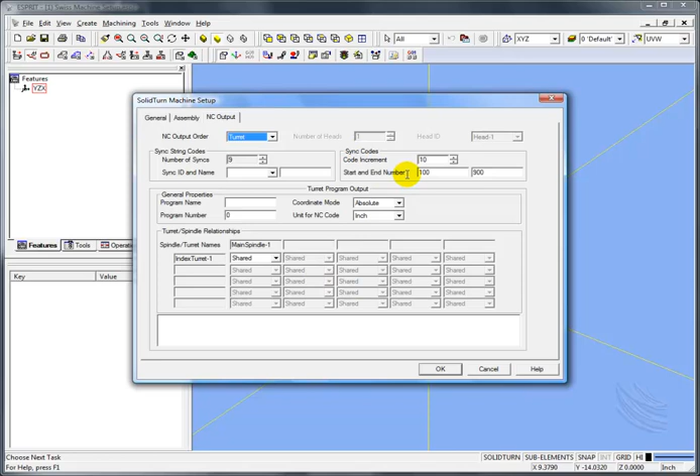So clearly we don't have enough information here. And if I go to the NC output page, this is set up to post by turret. There's no information about heads or anything of that nature or synchronization that's listed. Those are things that we're going to add ourselves.

Now this file is not completely blank. There are other components in this file. They just happen to be on some other layers. So I'm going to open up my layers list, and we have a number of layers predefined on this particular file.

If we start with the main gang, I'm going to open that up. You'll see that I've already constructed a solid model of this main gang. And in fact, we also have some views here. If I go into a work plane or view plane for the main, looking into the part this way, you'll see that we have some dimensions thrown up here so we understand how the tools are to be laid out on the part.

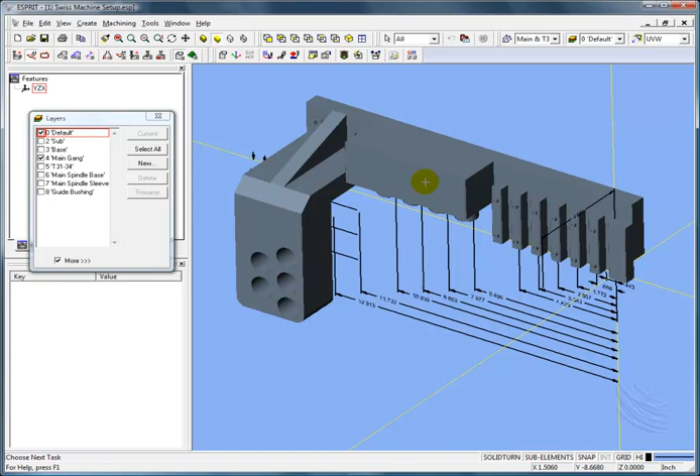Now, if we take a look, this solid model is something I have modified a bit. I'll admit I borrowed this from another machine setup and just modified it to suit my needs. But it is a solid model, not an STL file. It is a solid, because one of the things we're going to do is make it suitable for making a solid out of this. So this is designed to match this picture here for the main turret, the main gang. So it's on this main gang layer.

The next component we'll mention is the sub. I have a sub listed here. If I roll this thing around so we can take a look at the other side, you'll see it has the sub, and the 3 stations attached to it. Again, 2 of those stations are live, and the 3rd station is a fixed station.

The next component to look up is one called T31 through 34. That's this end working station. I'll roll it around this way. That's the end working station that matches up here with these tools laid out like this. So the first station you see listed there is a fixed station, and the other stations are rotating stations.

Now you'll notice that on each of these, if I change this so I can see it, on each of these solids I have laid out some dimensions so that we know these dimensions. This is important because we need to know the distance between these stations - it's not enough to just have the solid model there, we must also tell the machine setup how far apart the tools are going to be located at each station.

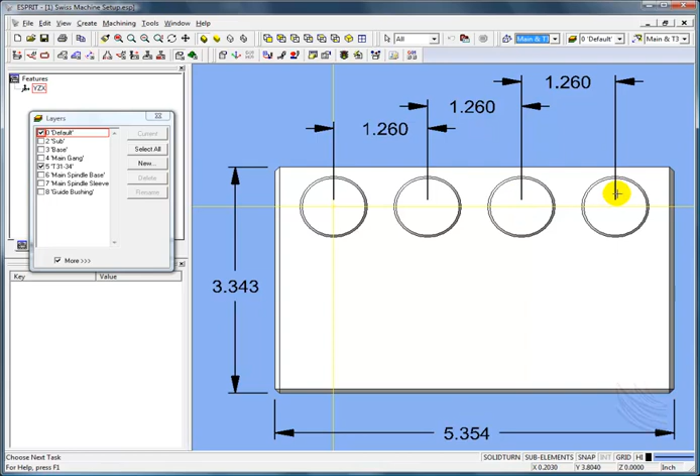So it's important you also notice the positioning of these solids. For example, this solid is setting so that X0, Y0, the origin - we'll talk about the axes in a moment - but the origin is in the middle of this first station. And if I look at the sub spindle, you'll see that the origin is sitting right in the middle of that station, of the sub spindle.

And if I turn on the main gang, you'll see that the origin is sitting at the locating area, this locating face, of station number 1, the very first station that goes in, the first tool that will go in. That's where it's located, and that's where the X0, Y0 would be located.

So if I turn all of these on, it's going to look a little cluttered because they're all going to be kind of sitting on top of each other. But this is important - it's set this way for a reason, and that reason is that when we actually define these as axes, as machine setups with axes, when we use these components in the machine setup, it will have a point of reference to move from.

And so it will know that when it goes to X0, Z0, it knows that the main spindle is going to be on center line. So it's important to have that point of reference. So you don't just simply put an STL file or a model up there and haphazardly place it on the screen. It's important that you locate it such that the machine setup will understand and use it properly.

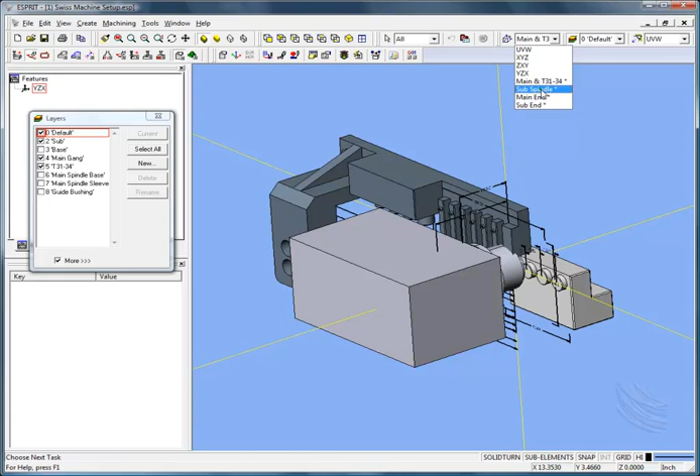Now the next thing to take into consideration is the axes themselves. If I change back to my work plane of XYZ, and you see I created some other work planes, and they're really more for convenience than anything. If I go to the sub spindle, I'm looking into the sub spindle. If I go to sub spindle end, sub end, I'm looking in the end of the sub spindle. Or if I go to the main end, I'm looking at the end of the main gang.

But if I go to XYZ, and I'll roll this to kind of an isometric view here, like so. If I now turn on my axes indicators, if I do a right-click, view, get out here on the screen a little easier so you can see, right-click, view, and UVW axis, you'll see how the axes are laid out. They're really not laid out the way you might think they should be.

For example, if I'm normal turning, pretty much everything is set in this orientation in the XYZ work plane. If I can get a top view, it's this view right here. But you see how these solids are not laid out in this orientation, nor are they laid out in an orientation that really makes a lot of sense other than to the axes of the machine. And you see how the Z is pointing in this direction, the X is pointing in this direction.

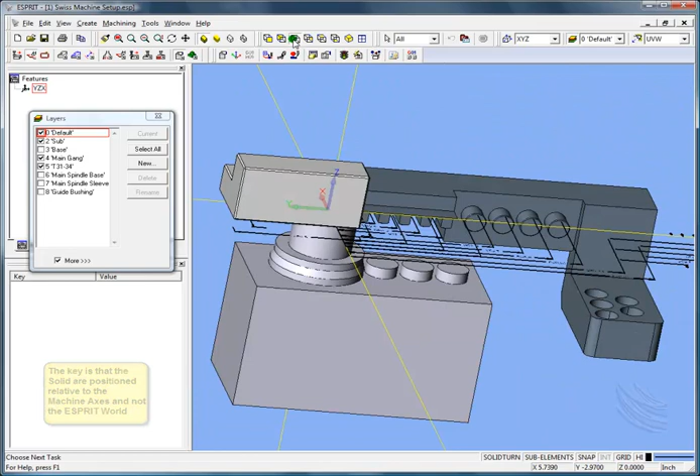Now if we look at that from, let's say, the end of the part, let's see what we get here from a view that we might want. This main end view here. This is really the view if I'm sitting as an operator looking in the door at this machine. Now the only thing that's a little different about this is if we look at the axes, we see that this is a Z, and this Z is actually going positive in this direction, and this Z is going negative in this direction.

Well, what we'll do is we'll actually tell that information in the machine setup when we tell it the direction of Z there. But we're going to leave it in this orientation because we want the X and the Y values to be correct relative to the normal orientation of the machine. So as it sits on the machine right now, this axis here is going to be Z. Here's my X going up and down this way. And then, of course, my Y-axis will be going across this way.

Now, once I have these components created, and again, I'm not going to go through the process of drawing all these things from scratch. We cover the way to use the solid modeler, which is found over here under Create Solid Modeler, in other tutorials. We cover that in the beginning tutorial. We also do a little bit of that in the advanced milling and the advanced mill-turn tutorial as well. So these are already predefined and created as solids.

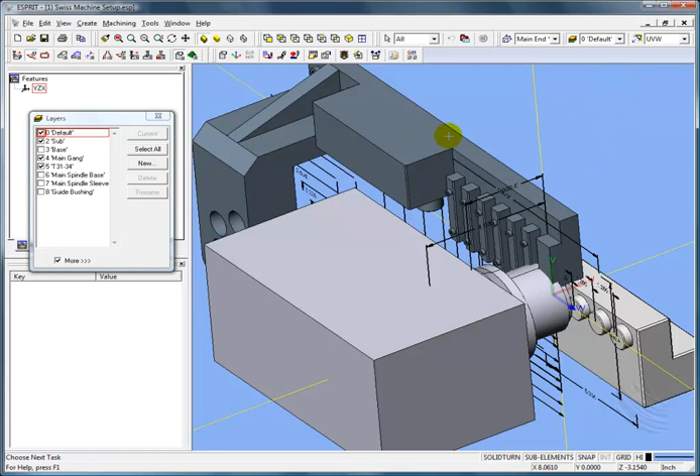Now, one of the things I need, if I'm going to use these in my machine setup, is to actually create what we call STL files. That's what we actually use in machine setup. So what I'm going to do is actually group one of the solids. Now, if you have multiple solids on the screen, that's fine. Just whichever one you group is the one that you'll be able to create an STL file for. And while I have this grouped, I'm going to go in and save this off as an STL.

Now, the process I'm using right now requires you to have the STL Data Translator. As I mentioned before, it's not necessary to have these solid models. However, there is a keen advantage, and you'll see as we use this machine, in having these. Now, if you do not have the STL Translator in your Esprit license, then certainly you could use any other CAD product to create these STL files.

Only thing I caution you about is I would first bring those solid models into Esprit and position them in the right location with regards to the axes and the origin, and then maybe pass this file back to your CAD software as a Parasolid or ACIS file. And then in your CAD software, you could then construct the STL files. But you don't want to just throw STL files out in space somewhere. The machine setup really is not configured to try to find those locations. It's best to prepare these up front like I've done here.

So I've grouped my main gang, and I'm now going to go up to File and Save As. Now again, keep in mind that I'm doing that because I have the STL Data Translator on my Esprit license. And what I'm going to do is I'm going to drop down to Save As Type, and I'm going to tell it I want to create an STL.

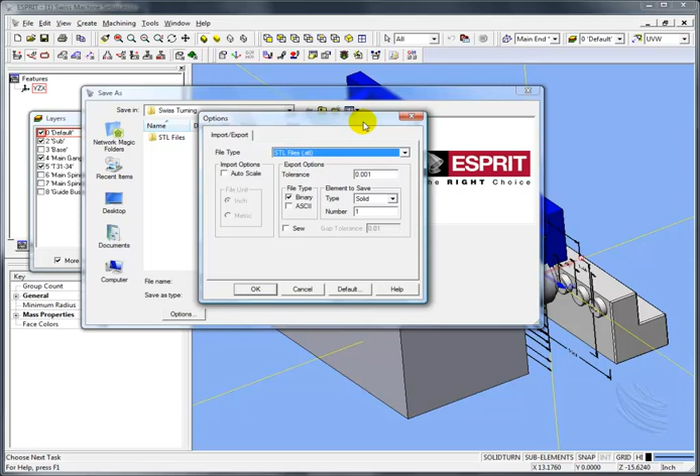Now, one other consideration to look at is under Options. I'm also going to look under STL, and if I want to, I can adjust the tolerance. This is one thing that gets a lot of people in trouble: if they go to the trouble of building a really complex solid model of a component for their machine, say they add a bunch of screws or some text, some engraving, coolant nozzles, whatever fancy things you want, you can clearly model those things on here.

But it can kind of bite you a little bit if you make some really fancy solid, and then when you start running Esprit with that solid, you start finding some performance issues. So one way to help reduce some of those performance issues is that you can go into the Options page and change this tolerance. Let's say I change this tolerance to 50 thousandths. That will create my STL file with a higher tolerance and make the file much smaller, and that will help improve your performance.

And of course, if you're doing this in some other CAD system, you'll have to use their technique to change the tolerance. Esprit, when it uses these STL files in the simulation, in the machine setup, does not have any way of filtering or making this file smaller. It's going to use the file as it was constructed. So any decisions about increasing tolerance for performance need to be made at the time of creating the STL file. So I've set my tolerance.

I've hit OK, and now I'll give it a name. I'll call this my main gang turret, and I'll hit save. When I do, it creates an STL file. Now I'm going to save this next one. By the way, if you don't group anything and you go up to File, Save As, in Esprit at least, and I say STL file and give this a name, I'll call this my Sub Spindle.

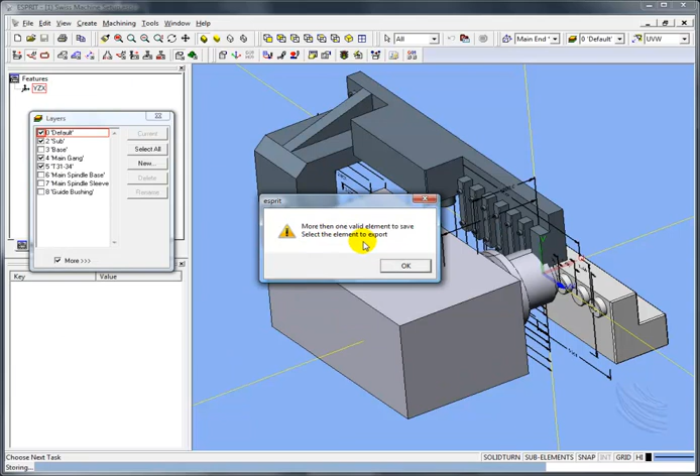If I hit save, it's going to give me a warning. It says more than one valid element to save. Please select the element to export. So I did not identify which solid to do this with. So you have to make sure you pick a solid first. Then you can go in and Save As and use your STL. So under STL, the option should still be set to 50 thousandths, and it is.

So I'm now going to give this a name. I'll call this my Sub Spindle Turret. That's what I'll call it. And I'll go save. Now I'm going to go ahead and pick the next solid here, and I'm going to go in and save it. File, Save As, STL, and we'll give this a name.

This will be the end working turret. Oops, my fault. Let me change that back to STL, and let me pick the right field first. Kind of silly me. End working turret. There we go. So save that one. Now I do have some other components here, and I'll just turn these off.

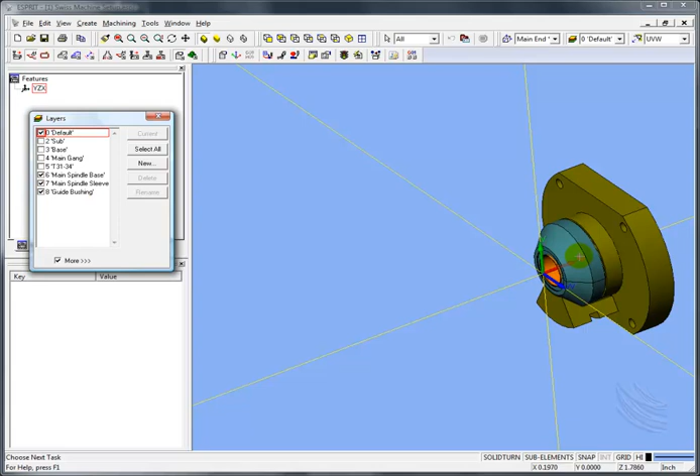And I'm going to now turn on a main spindle base, a spindle sleeve, and then our guide bushing. We'll talk more about the guide bushing a little later, but it's an important reference for you. Of course, any of the Swiss machines have a guide bushing. The point is it's best to have something graphic to illustrate that guide bushing, and I do that in this case. So we have three other solids we're going to add.

So first I'll grab this one, and you see again where it's positioned. This is positioned at 0, 0. Let me get a top view actually is what I want. There we go. This would be Z0, if you will, on the machine. This distance back from here to here is how far it is from Z0 to this spindle face.

Different machines, different values. The point is these solids are set up correctly with regards to that distance from Z0 to this locating face of the main spindle. So I'll select this solid. I'll do a File, Save As.

We'll tell it it's now going to be an STL file. And we'll call this the main spindle base. We'll give it that name. Call it a base. I'll pick the next solid here. I'll do a file, save as, and STL.

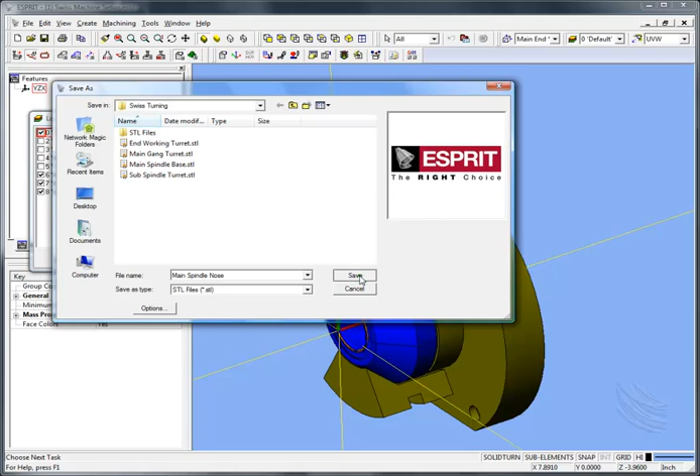Click on the name field. This will be the main spindle nose is what I'll call that. Let's fix that name. There we go. Spindle nose. Save that. And let's get this guy here, this solid inside. I'm using this as a bushing. We'll talk about the size of that bushing and how I've designed it that way.

File, save as, and STL, and we'll call this the guide bushing, and save. Now you will notice as I save this that there was an existing STL folder there. That STL folder has really the same exact files that I saved previously that I'm using in the files that are the completed portions of this. So even though we're going through this from scratch, these STL files have been saved in another place, and they're on your system as you install the Esprit files.

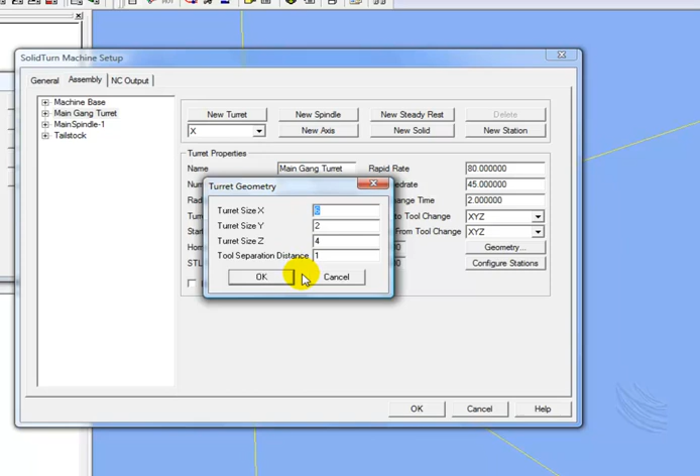Now the problem with that is, of course, what you'll end up with is just a single block, and that single block is really not going to help us much with this shape that we're going to be working with. I mean, we could define this main turret as one of these blocks. We could even attach this as part of that block as well, but we really wouldn't be able to put this on that same block because this type of gang turret is really only going to be good for maybe these first 10 stations. We'd have to create a separate one here, and I really don't want to do that because this block is actually attached to this, so they float together.

So really we want this all to be one unit, which is what we've done in the solid model we have. So in this particular case, since we have a solid model, the choice of gang is really not appropriate. So I'm going to change this gang now to what's called a custom. Of course I wouldn't use magazine either because that is for a tool changer. I'm going to use a custom. Now when I hit custom, you'll see how the geometry and configure stations disappears. That's because it's now going to use all the information that we plug into the machine setup to customize this particular turret, including the graphics of that turret.

Home position, we'll talk about that in a minute. Ensure tool number matches station number. I'm going to do that. That way when I define a tool in a station, I make sure the tool number matches. That's a real handy tool in this case. I really like to use that on anything unless it's a magazine. A magazine is the only place where I won't do that.

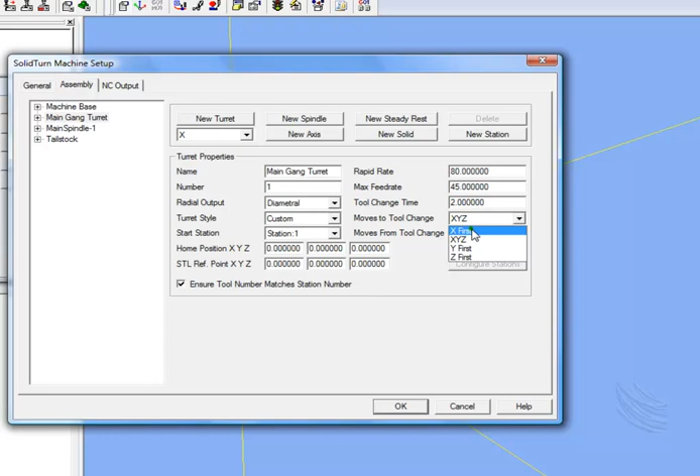Any of the other adjustments, I might make a move to tool change. I might adjust that to move X first, so it moves up in X. Right? The rest I'll leave alone. So now once I have done that, I can now move over and open up the main gang, and we can then talk about axes and tool stations. Axes I'll come back to in a minute. I'm going to start by going ahead and defining the tool stations that I want to define.

Now, I'll close this axes for a moment. Currently there are 6 stations in this turret. And again, that's the default with the normal turret. But really what we're going to be using in this particular main gang is 15. We have 15 stations here. So I'm going to go in and add those stations. I'm going to go up and basically say new station and continue adding new stations until I get all the way to 15.

Now, identifying those stations is only part of the battle. It's only a little piece of what we need to give information-wise. All that does is tell us that there are 15 stations. It has nothing to do with where those 15 stations are located. That I have to identify by going in and adjusting that inside of each station in these settings.

Now the first thing I do need to deal with is when I click on a station, you see how this angle changes? That's because these first 6 stations were defined as an index turret. I really don't want that. So one way to deal with that is to go back to axes. I said we were going to skip axes, but we're going to come back to it for right now. We're going to hit this index and delete it. So now there is no index axis. So when I go to station 1, you won't see anything here because there's nothing to index. So that's all going to remain dimmed.

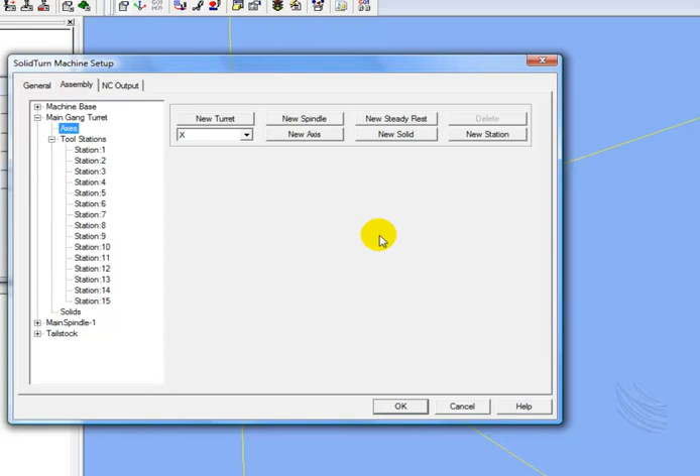Now, the order that you identify axes, when you define an axis with a turret or a spindle, it's important that the order becomes what we would call a hierarchy. By that I mean the order you identify the axes is the order of importance of the axes. So I'm going to identify first my Y-axis, because clearly for any tool to work, Y has to move to position that particular station relative to the part.

So I'm going to simply grab Y and hit new axis. Now, for a label, I could leave the label Y, but really it would make more sense to label it like the axes show. I'm going to use Y1 and X1 for my label. So I'm going to call this Y1. I have the information here as far as the axis vector: it's going to move along Y. That's what the 1 means here.

And then we have a minimum and maximum position. I'm going to tell it that it can move minus an inch and it can move plus, let's say, 20 inches. If you know the exact value, plug that in. Now, does that necessarily mean that's going to be a hard stop in the machine? No. However, you can add logic to your post processor that can look at this number, and if you exceed these values, you can have it flag you in your code if you wish. It's not a bad idea to go ahead and plug in the appropriate values here.

Now, I'm going to plug in the next axis, which will show up underneath Y1, meaning it will be the second most important axis on this turret. That'll be the X-axis. And I'll say new axis. There's my X. This is going to be X1. It is linear, and you see the 1 is in the X vector, which means it's going to move along X. Let's say the minimum position is minus a quarter of an inch, and the maximum position is 12 inches. So I'm identifying the axes of motion.

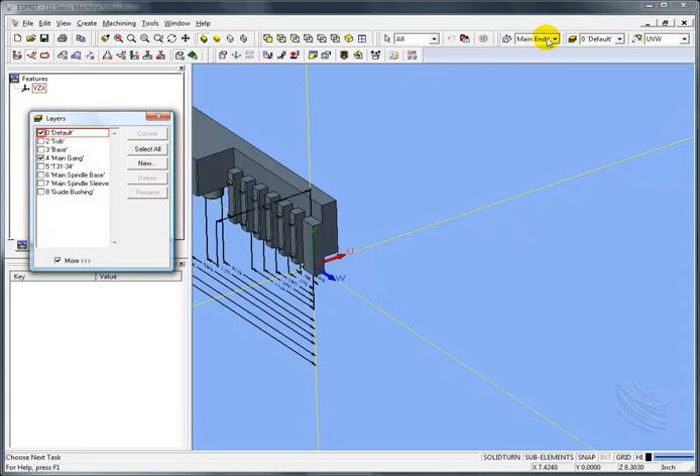So I'm going to identify some of that information from our graphics file. I'm going to minimize this because there's no dimensions here, of course. I'll move this out of the way a little bit. Actually, let's hit OK real quick, go back into our layers and turn on our main gang. I'll get a view, look in top, and zoom in closer. When we open up machine setup, we should be able to see some of these dimensions, and we'll work our way back and forth from there.

Now, one thing I will point out is it may be necessary to actually shift some of these dimensions both in X and in Y. Clearly, I'm going to be shifting some of these dimensions along this axis, which is the X-axis in this plane, but in the machine we're looking at that as being Y. That's my Y-axis. So we have that information to be plugged in from the Y. But we may also find some stations that need to be offset off-center. So we've got it in position. We zoom in a little tighter, and let's now open back up our machine setup.

I'll move it out of the way a little bit so we can see both. Alright, so now we go to assembly, we go to the main gang, we go to our stations, and we click on station number 1, which will be this station right here.

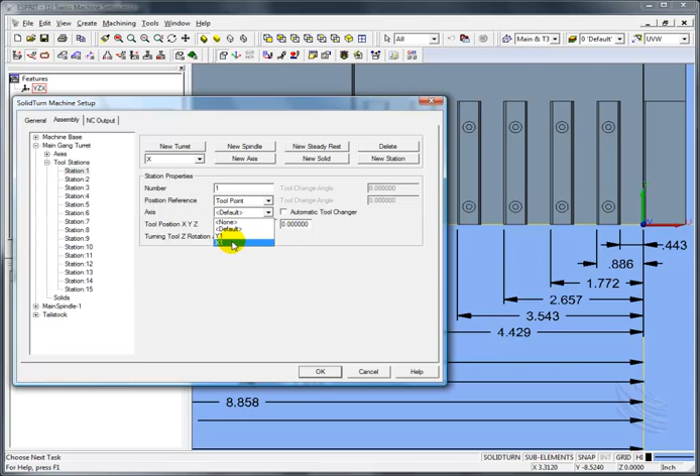Now, under axes, you'll see I have those axes. I could identify a tool to move with an axis, but that's really not what we want to do. Really what happens is this entire gang turret moves with every tool. So leaving this on default simply means it will move with the default axes of this gang turret. If I change this to something else, I'm telling it that this station can move independent of this main gang, which it doesn't.

Now, if we look at the values here, I'm going to start with 0 here, and I'll say 0, 0, 0, which means I'm telling it that the location of this tool is going to be located right here at 0, 0, 0 for station 1.

Now for station 2, and by the way, you wonder where that 7 inches comes from. You'll find that all 6 of these stations will have 7 inches on them. When I go to 7, I won't, and that's just because they were part of the original index turret. So those numbers were in there from that index turret.

I'm simply editing those. So we're going to make sure that each of these stations is set to tool point, default, and we're going to plug in the appropriate location. So station 2, tool point, axis is default. Change this to 0, and now my Y will be minus 886 thousandths. So minus 0.886. Okay, now from here I go on to station 3.

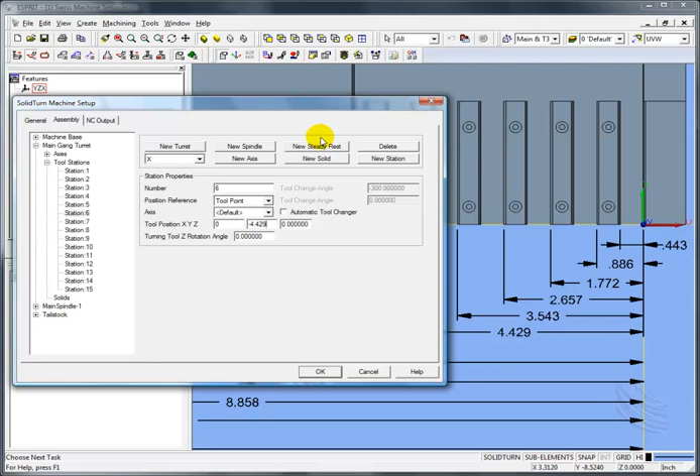Change that to 0. Change this back to tool point. And now change this number to minus 4.429. And that gets all of those. Drag it out of the way, that's all of the turning stations.

Now I'm ready to move on to the next stations, and to do that I'll hit OK so I can move the screen. Okay, and I'm now going to drag this down, and now I'm ready to look at these next 4 stations here, which is stations 7, 8, 9, and 10. These are the live tooling stations.

Now one dimension I see that's missing, so let's take a quick look, is you see how that station is actually off-center from 0. And so I'm going to need to know what that off-center is. And if I look, wireframe, there's no geometry here. So I'm going to go in and kind of construct some geometry.

I don't want to get geometry for the whole file. I don't know that that's really all that necessary, although it won't hurt. Let's take the whole solid. I'll do a right-click, copy. And under transformation type, I will say I'll do a smash. And I'll change it to a wireframe, and I'll set the tolerance to about 1,000th, and I'll hit OK.

And that's going to get wireframe geometry now. Now I can go in and change my filter to geometry. I can pick one of these diameters here. And what I'm looking for is the center point. I'm looking for the center point of Z. And I see the center point of Z is minus 433, minus 0.433. So knowing that, that's how far off center the center of that station is going to be.

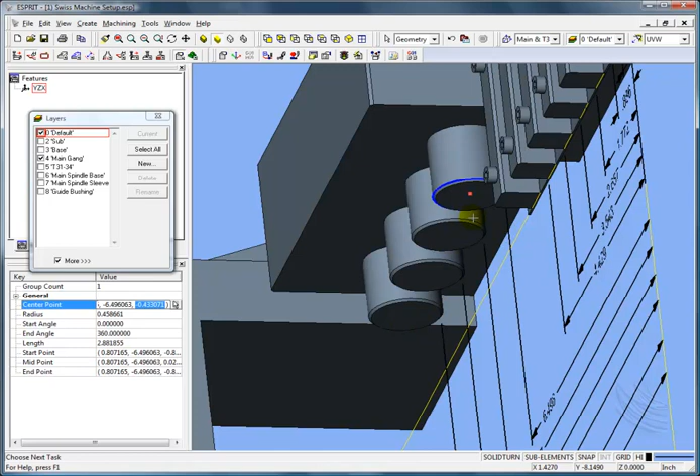So for station 7, instead of using the tool point, I'm going to have it use the holder base. That way the length of the tool will be reflected from a fixed location. If you look at the turning stations, you can slide those up and down to be really anywhere, and that's why I use tool point there. But here, the tools are fixed - they're loaded in and only go in one location. They can be different lengths sticking out, but we define that when we define the tool. So holder base is really a better choice for these live tooling stations.

Now for tool position, we're going to plug in 6.496, so it'll be minus 6.496. Then we're going to make the shift in Z - that's the offset in Z. And the direction I'll shift this in Z is minus 0.433. See how that works?

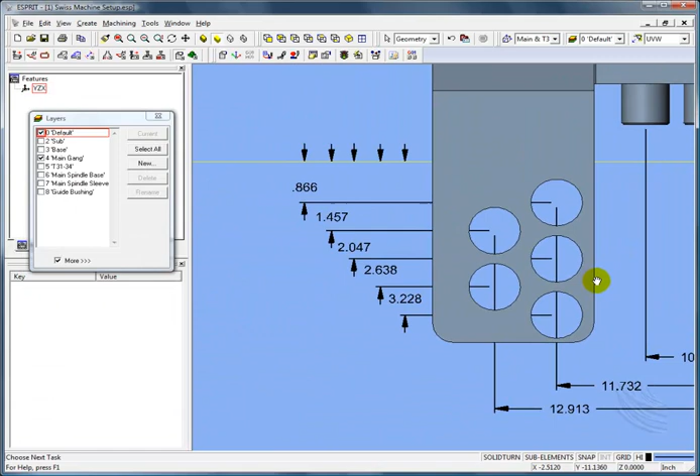Now I'm ready to look at these next stations. These next stations are basically holes in this block, and we have the locations in Y, the Y minus locations. But there's also another dimension here. Let me get the main end view - you see this dimension here, 4.638. That's the dimension from 0 back to the back end or locating end of this face. So I'll define the tools relative to that.

Now, probably I should have thought this through a little better - I might have rather done this from the middle of this base. Why not do that? Because that way we can define the tool from the middle going in either direction. So let's determine what that's going to be.

I'll do that by going in and creating another quick dimension. I'm in this work plane, so I'll go up to dimensioning, and dimension from 0 to the middle of this connection line, placing the dimension across there. You'll see that it says 3.697 - let me move that dimension a little bit. There you go, 3.697 is what that is. So I know that dimension. What I'm doing right now is writing that down - 3.697, because I have a short memory.

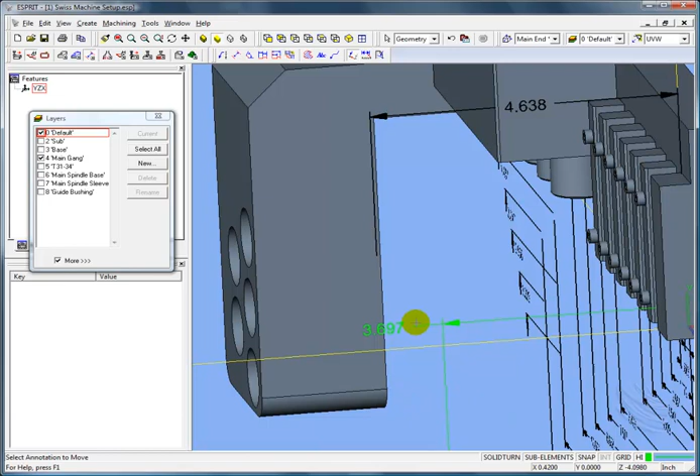So that's the distance we'll shift off center in Z for those tools. Now, next thing we're going to do is get to a straight-on view here and zoom in so I can see those stations, and we'll open up our machine setup again.

Keep in mind that what we're defining now are these stations 11 through 15. So we'll go into main gang turret, tool stations, starting with station number 11. 10 we did, and we're going to do 11. We'll also use the holder base again, and we'll turn automatic tool changer off. We'll change this to the first line, which is 11 point minus

I've modeled this thing actually a little differently. I looked at the picture, but I've modeled it with 3 stations on this side, 2 on this side. Since I have the solid model created, we're going to use this method. I just now noticed that.

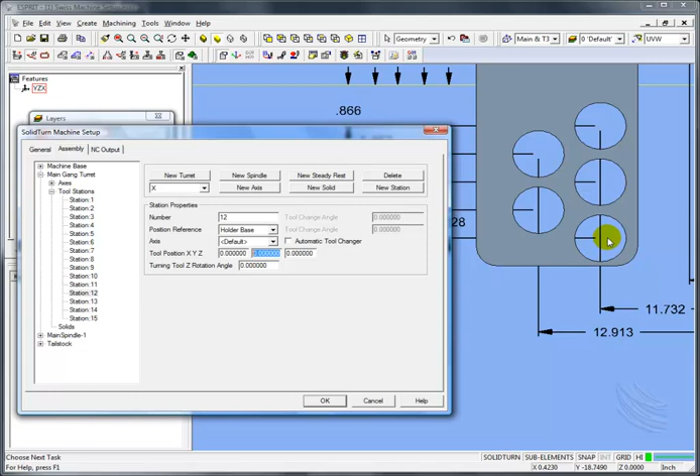11.732. Now the Z will be minus 3.697. Okay, see how that works? All right, now let's go to station 12. No automatic tool changer, so I'm making this one 11, 12, and 13, and then 14 and 15. So 12 is right here.

All right, one other thing, let's go back to 11. There's also a dimension down in X. That's this dimension in this direction. You can see that dimension here is 866. So station 11 needs to be minus 0.866. Now we go to station 12.

The automatic tool changer is off. That's going to be the next dimension down in X, which is minus 1.457. And the Y will be this dimension here, the minus 11.732. It's this station right here that we're doing. Actually, my X is wrong, isn't it? It should be this 2.047.

Minus 2.047, get it right here. So minus 2.047 gets us to this line, which takes us to this station. That's the station we're doing right now. So there's my dimension in Y, there's my dimension in X. And of course, my Z will be the same number, minus 3.697. Now I'm ready to move on to station 13.

Station 13, I've got a little bit off the screen here, but that's okay. Station 13 now is setting here. So the X is going to be minus 3.228. Y, okay, the Y dimension is going to be this same dimension, the minus 11.732. And the Z will be that minus 3.697 dimension.

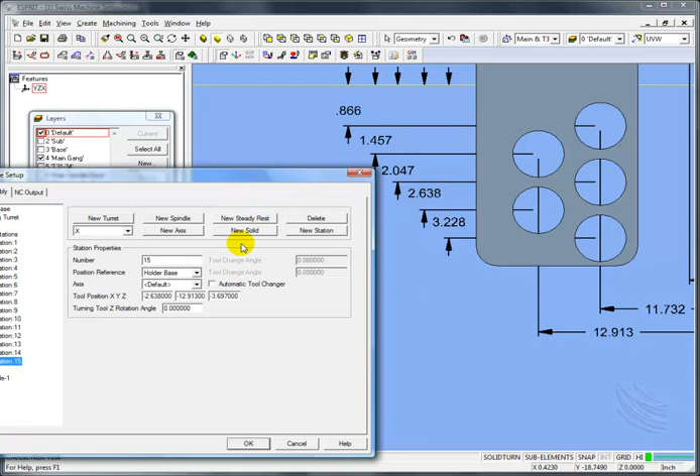So it's important, especially on a Swiss machine, that any tool mounted in the station is used properly. Okay, so it's display. We want it to be displayed, so we want to make certain that this automatic tool changer switch is off. That's very important. Okay, so now we're done with the main gang turret. We're ready now to move on to the next component.

Well, now that we've added the stations and axes, there's one more component we need to add to the main gang turret, and that's going to be the solid model itself. So we select on solids, and we're going to define a new solid, and I'll give it a name. I'll call it the main gang. Give it a color, you choose that.

I'm going to leave it solid, I'm not going to make it transparent. And I'm now going to select our STL file. So now I'm going to select the main gang turret that we saved a moment ago.

Now at this point, one critical decision you need to make, and this will depend upon the way that you manage your files, is whether or not to embed the STL file into this machine setup. Now, the difference here is that if I do not embed the STL file, then I need to have a clear path to read this file every time I open up a program or the machine setup that is using this STL file. Pros and cons here are that if I do not embed the STL file, then the actual Esprit project that I'm working on will be much smaller.

I will not have all the extra STL files embedded in those Esprit files. The disadvantage is that if I were to want to send this file to a colleague or to Esprit for support or anywhere else, if you do not embed this file, and the person you send it to does not have this exact same path and this external STL file, their simulation won't look like yours. So I can't really tell you which way is better.

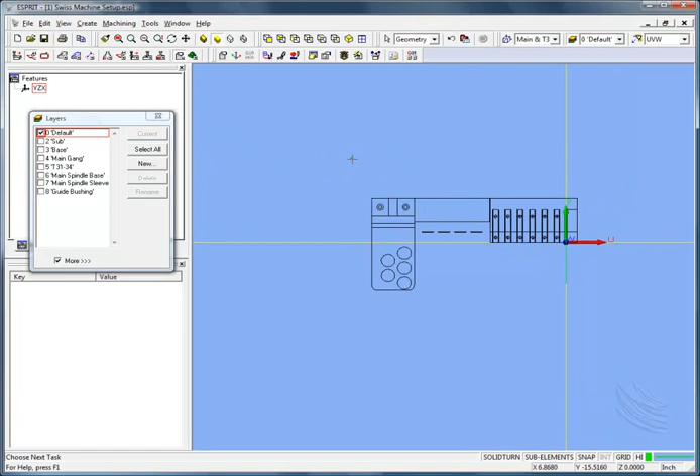Now I've got some extra stuff here that we had put on before. I'm going to grab all that extra geometry and just delete it. Don't really need it. Actually I'll grab all and put a box around it. There's a dimension out there too that I'll delete. Now, since I've added that one component, I'll change my work plane back to XYZ, and you see where the orientation is to XYZ now.

Let's say I decide to run a simulation. There's nothing in this file, but just by going into simulation and firing off simulation, any of the components that are in the machine setup will appear. In this case, you'll see that we now have our main gang turret sitting here. It's sitting on the stock, and we have this large chuck located here. Now this chuck, we haven't dealt with that yet. We'll be dealing with that shortly, but you see how our main gang turret is actually sitting in this location.

Now, one thing I really don't like is where this orientation is here. I obviously want to move it up in X. So one of the things I can adjust quickly is I can go into my machine setup, and on the assembly page, main gang turret, I'll add a home position in the X-axis. Let's say 2.5 inches, for example. If I fire off my simulation, it's now going to be setting up that 2.5 inches. So we now have our first component added to our machine setup.

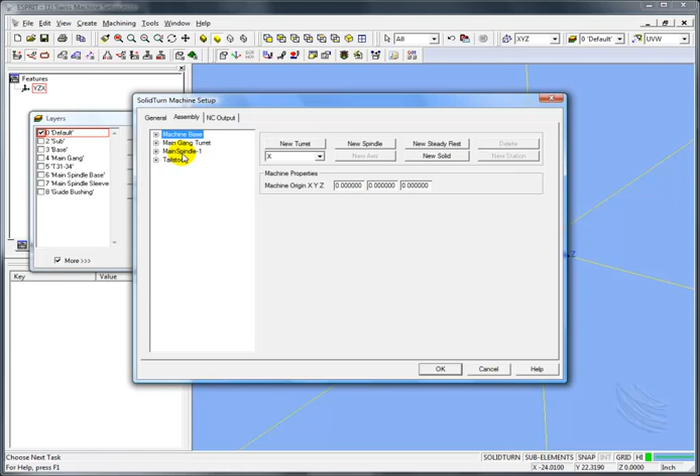Let's now deal with the next components. Let's go to Setup, and go into the assembly page. And we're ready now to add the next component. Now, what we could do is go ahead and deal with this spindle that we had. If you recall, we fire off simulation again, we got this spindle sitting out this way, and we also have the stock pointing off in this direction.

And if we relate that to our drawing here, we see, of course, that really the stock, as we start a program, should be sitting over in this direction, and the stock's going to be fed towards the sub spindle, which is located here. That's because this particular machine setup, with regards to the spindle, is set up like a traditional turret lathe would be, with the chuck on the left, the stock starts on the left, and the tools come in from the right.

This Swiss machine, which is not unusual for a lot of Swiss machines, is exactly the opposite. The main spindle's on the right, and the material is fed towards the left where the sub spindle is located. So let's take care of this spindle while we're at it. We'll stop that simulation and go back into Common Machining and Machine Setup.

We'll go into the assembly page, Main Spindle. Main spindle name, that's okay. I'll get rid of the -1. Don't really need that. It is a main spindle. One thing I will change immediately is this orientation setting. And the orientation setting is going to point the turret.

In this case, based on my sketch, I have Z plus pointing to the left and Z minus pointing to the right. So that's what I'm going to use here. I'm going to use this one here, right plus, which means going to the left here is a plus direction in Z.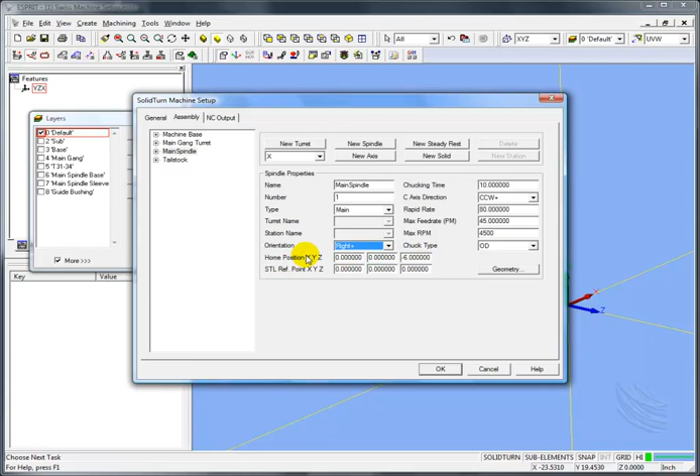All that's happening up here is this is a guide bushing that's going to guide the part as it's being fed in and out and held at a position behind the part. Now that position behind the part is where I'm going to reference my home position in X, Y, and Z. Typically what you'll want to do is identify a position that represents where that chuck's going to be located when you start a program.

Let me turn on the chuck component so you can get a better feel for this. Typically that's going to be a position back behind the part, and the distance from this location to the bushing is going to be the amount of stroke that you have. When we refer to stroke, we mean the amount of travel that the material has in one direction, material being fed out of the spindle. The amount of distance we move out of the spindle before it has to be rechucked, where the chuck holding the part has to be picked up, moved back, and grab some more material.

So I'm going to designate a position of being about 8 inches. I'm telling it that we have about 6.5 inches of stroke before we run into the chuck. I've identified my bushing here to be about 1.5 inches long. So we're going to go in and identify on the main spindle. I'll again take that off, change this back to plus. And I'm going to change this home position to a positive 8 inches.

Positive 8 inches. Now that positive 8 inches is not relative to the axes that we've identified here. It's relative to what Esprit sees that Z-axis to be. And Esprit, like normal Cartesian coordinates, sees this direction as positive. So 8 inches positive is going to be set out here.

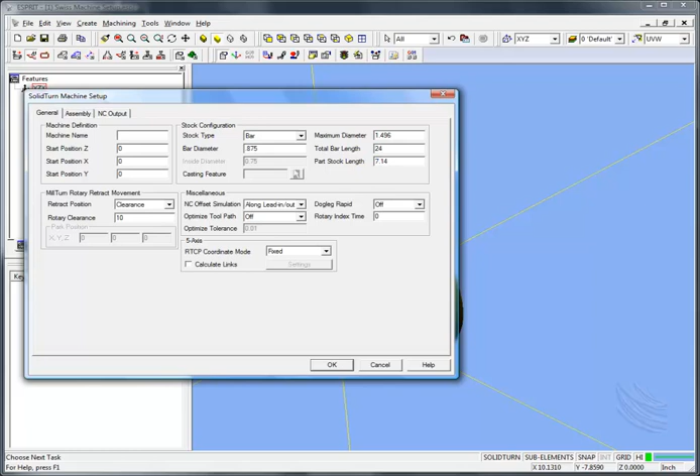Total bar length, I'll tell it's about 24 inches long, and the part we're going to machine for our first part is 7.14 long. Next thing I'll plug in is a starting position for my stock.

I'm going to tell it has 10 thousandths worth of stock sticking out of the part, and so we're going to be working with 10 thousandths worth of stock to be faced off. So I'm going to identify and set this to a minus 10 thousandths. Now again, that minus number is relative really to the world coordinate system in turning. So minus 10 thousandths is the correct value.

Now let's hit our OK button, and I can close these components for right now, and let's fire off a simulation again. Now what we'll see a little different here, let's roll it around to the right orientation, is this chucking device 8 inches back on the part. Our stock is pointing in this direction, and it's sitting just like this. Okay, and that's good. And if I get a top view, that's how it's going to sit in a turning orientation. Z0, and then Z is going to be feeding it to the left. All right.

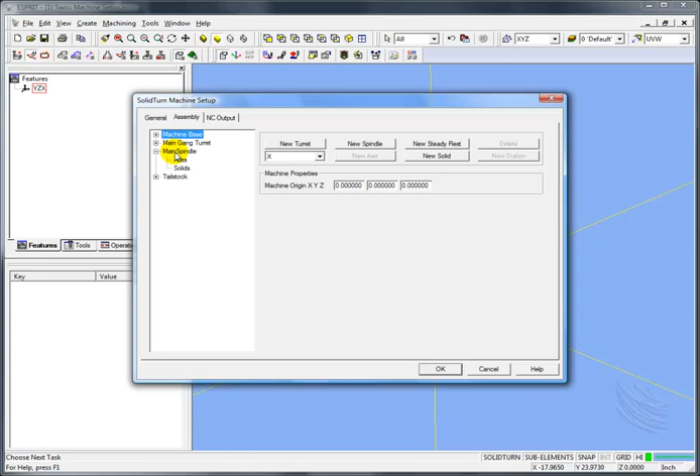Excellent. All right. Now let's add some other components. Let's go in on the assembly page. Let's go ahead and add this on the main spindle. Let's go ahead and finish it since we were in the process of modifying that. Let's talk about the axes. There is going to be an axis. This main spindle does in fact move. When it's gripped out here, that part's going to move in and out.

Now the axis we're going to use is from our drawing. It's this Z1 axis. So we're going to identify a Z1 axis. We're going to go in and say axes, Z, new axis. I'll call it Z1. It is linear. It does move along the Z-axis vector, which is correct.

And now I'll plug in a minimum and a maximum distance. I'll say it can move minus 1.5 inches, and it can move plus, let's say, 24 inches. And again, if you know the right numbers, plug them in. That gives us an axis for the main spindle. So now the Z-axis is going to be driven by the main spindle, moving the material in and out of the part. Last component we'll add for the main spindle is going to be the solids themselves.

So under the main spindle, if we look at solids, there really aren't any solids for the main spindle, and they don't need to be. You could draw something up. We could have created something for that main spindle, but we're not going to. Now you may think that the solids here really should have been these items here, but that's not true.

Because if I had gone into assembly, main spindle, solids, and added a new solid with these STL files, then when the material is being fed with the real spindle, which is back here gripping the part, this would all move with that. In other words, these would move as the material is moved. And I don't want that to happen. I need this to stay stationary. So these are not going to be added to the solids under the spindle. They'll be added elsewhere, and we'll talk about that a little bit later.

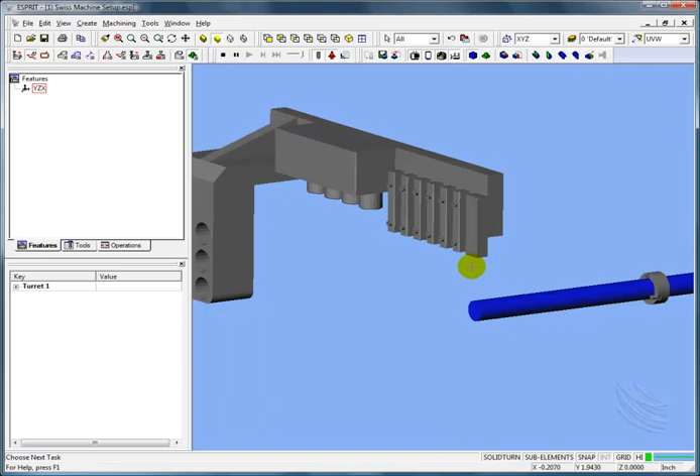All right, so we're ready now to go to our next component. The next component we want to add, I'll turn these three off, is the sub spindle. Let's get around where we can look onto the sub spindle and see the settings for it. Now we're ready to go ahead and define the sub. To make this a little easier to see, I'm going to turn on my shaded wire so I can see those other tool stations. And we'll go back into machine setup.

Now what we're going to do is add a new turret. Yes, this is a spindle, but the function of this item is not just to be a spindle. It also is a turret. There are stations on this to be used. So the fact that there are stations on this really takes precedence over the fact that there is a sub spindle. So what I'm going to do here is identify this as a new turret.

And I'm going to give it a name. Let's call it the sub turret, and I'll call it turret number 2. Its diametral is fine. Again, it's going to be another custom. If it was a gang, I could use a gang turret and identify the dimensions of where those stations would be on a gang block. I would give it the dimensions of the block, and the tool separation would be the distance between these stations. But that's not what we have. We have a custom in this case.

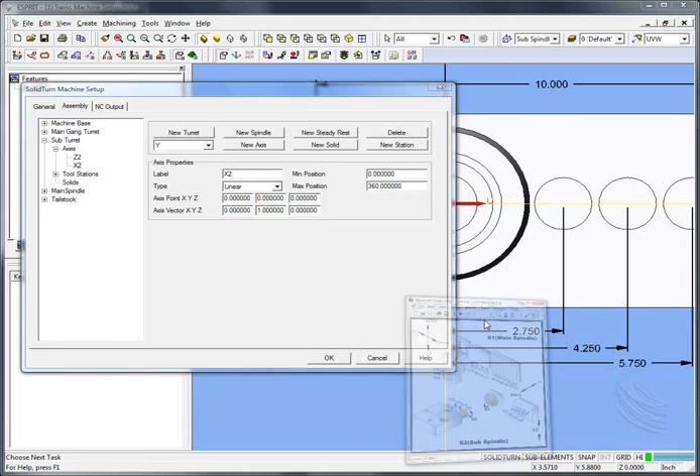So I'm going to go to the next axis. From the label standpoint, this next axis is X, but really the motion is Y. It's going to move this way. So I'm going to tell it it's a Y axis and say new axis, but make the name of it X2. A little confusing, but you see the contradiction: this can't be X and this can't be X. From Esprit's perspective, this is the X axis. This label is labeling an axis that moves along Y. So it is a Y axis in the sense that it has an axis vector in Y, but it's labeled as X2.

Now let's plug in some numbers here. We'll say it has a 0 in the minimum position, and it can go a positive 15 inches. So now we have our axes defined, and we're ready to talk about our tool stations. On our tool stations, there are really going to be 4 stations here. You may look at this and think there's just 3, but really there's 4.

We still need a spindle here, and so what we're going to use is we are going to define a sub spindle, but that sub spindle is going to be mounted on this turret. So the first station on this turret is going to be for the sub spindle. So we're going to take away a couple of these stations. I'm going to grab 5, delete, and delete one more time, and we have now 4 stations.

Now if we look at our picture, we see that these are labeled 20, which is the sub spindle, 21, 22, 23. So I'm going to actually name my stations those same numbers. 20, 21, 22, and 23. There's no reason for these numbers not to match up with what you have in your machine, so it makes it much easier when you depict tools, you know to look in station 20, 22, etc. Now let's talk about the settings for those stations.

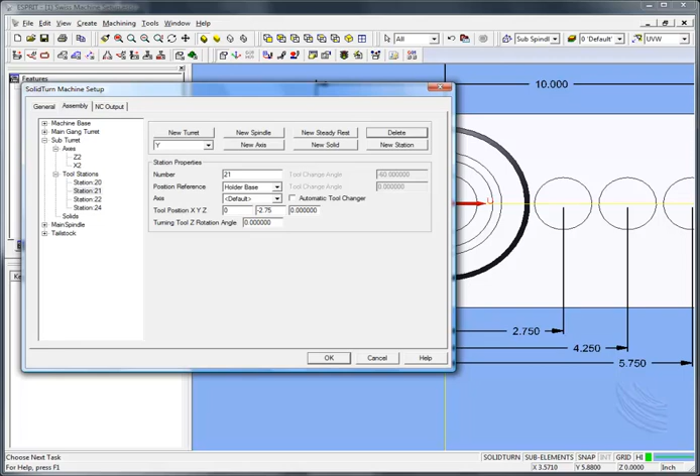Now there's one other thing. Let's hit OK. Get back in this part so you can see it a little bit better, zooming out. You see these stations aren't flush with each other. If I get a different view here, you'll see that there's actually 3 inches from the face of the sub spindle back to this back edge here. So it's 3 inches back to where we're going to locate the holder. I've identified a spot in the holder inside of the machine, a distance away from the end. So the holder will actually start here and come out this way.

You could define it exactly to be what this edge is here, which is actually 2.5 inches to this location. I'm going to use the 3 inches for my purpose. Again, you can adjust all these things as needed. So we go back into the assembly page. Sub turret station number 21 now is going to be a Z of, in this case, minus 3 inches. So it's moving in minus direction in Z, 3 inches.

And 22 is going to be 0. And it's going to be this dimension 4 1/4, so minus 4 1/4, and minus 3 inches again. And now we have 24, which is 0, and minus, no, that should be 23, shouldn't it? Silly me. 23, there we go. 0, minus 5.75, and minus 3. Now we've set the home position. We've set these values in where we want.

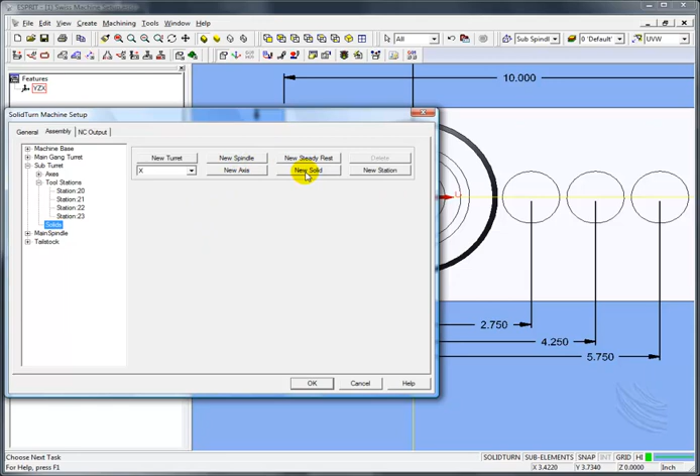Oh, one more thing before we move on. Let's add that solid for this. So under solids, we're going to add a new solid. We'll call it the sub turret. And we'll give it a different color if we wish. You pick colors as you prefer. And the location will be the default. I'm not going to identify an axis because it doesn't move with one axis. It moves with both. So by saying default, we're going to use both axes.

We browse and we find the sub spindle turret, and I am going to embed that here. We talked about that earlier. Now let's hit our OK button. Now if I zoom this thing around a little bit and change my work plane back to XYZ so I can see my point of reference better, roll it around, and fire off my simulation, we now should see the sub spindle with its graphic, the main gang, and this. So you can see it's again minus direction, minus 8 inches to here, and then another minus 3 inches farther from the face to these locations here.

All right, so you can see how we've identified that, and now we have the sub spindle. Looks good. All right, so now let's go to the next component.

We'll turn that off and turn on this T31 through 34, and get a top view on that. Take a quick look at those. I'll zoom it down a little bit and drag it out of the way. So we can see that we're 1.260 inches between stations.

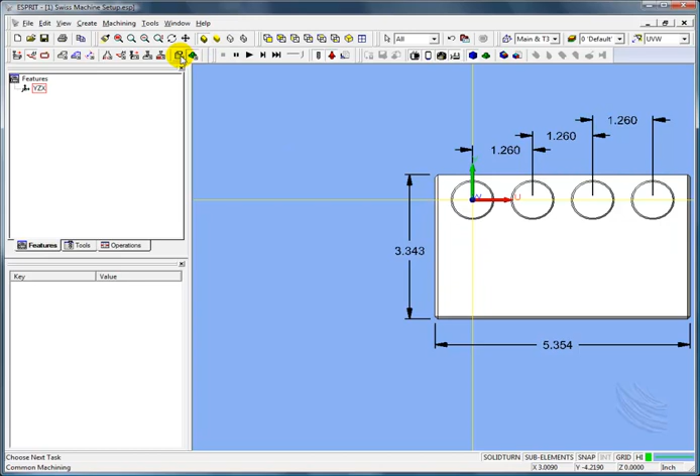So clearly we could define another turret. It could be simply a gang block turret if we wish, but we do have this graphic to use, so we will use that. So we'll now go in and we're ready to define the next.

So we go in and tell it we want another turret, so we do a new turret. This turret now is going to be, well, let's say it's the end gang turret. Now I'll call this turret number 3. And it's not an index turret, it's going to be a custom turret again because we have our own graphic.

But again, keep in mind, if you did not have this graphic, you could have gone into gang geometry. I could have said the turret size in X is this length, let's just say it was 3 inches. The turret length in Y would have been this dimension here, 5.354, excuse me. And the turret size in Z, the thickness, would be whatever, let's say 2 inches. And then this separation distance would have been 1.26.

So that, combined with telling it has 4 stations, would create a block that's this dimensionally in size and has this distance between stations, all right? In fact, let's hit OK. And let's just, for grins, go in and let's tell it has 4 stations. So let's get rid of this station and this station. Let's just hit OK, and I just want to see, close, 3.343.

If I fire off simulation, you now will see that other block. Now, I didn't tell it where to go home, but that block is actually sitting there, and where it's sitting at is right there. So you can see where it's placed a block right here, and that block was defined by the information plugged in.

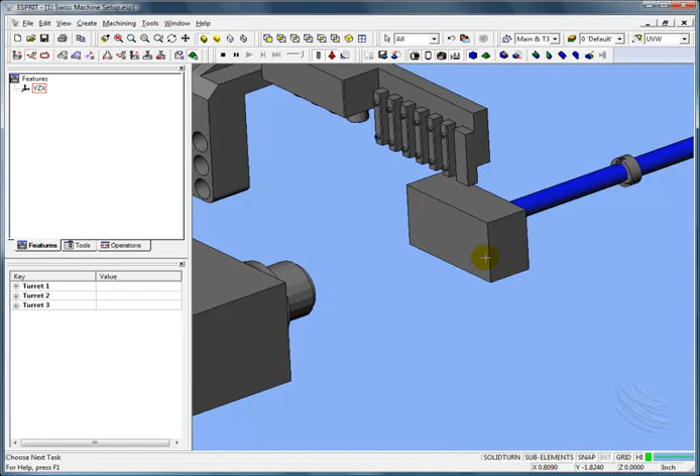Now there's no stations in it because there's no tools attached to it. All it does is show the block, and then the tools would stick out once you place the tools on that station, in those stations. Okay, but that shows you a little bit about how you can very easily and simply go in and plug in a very simple scenario of defining your own geometry to create a block like that.

And of course, we would give it a home position. In this case, as a matter of fact, let's give it a home position. Let's say Y is going to go plus, let's move it out, say plus about 9 inches. And let's pull Z out away from the chuck to be minus, let's say about 2 and 1/4. I'll turn this switch on. Let's hit OK. Again, these numbers are somewhat subjective, you'd want to make sure your numbers are correct.

But anyway, here you see that block. Now that block is sitting here. Now that's not a big stretch from this picture. You see how this block is actually sitting like so, and it would be in our picture like this. So you see I'm just positioning that block out like so.

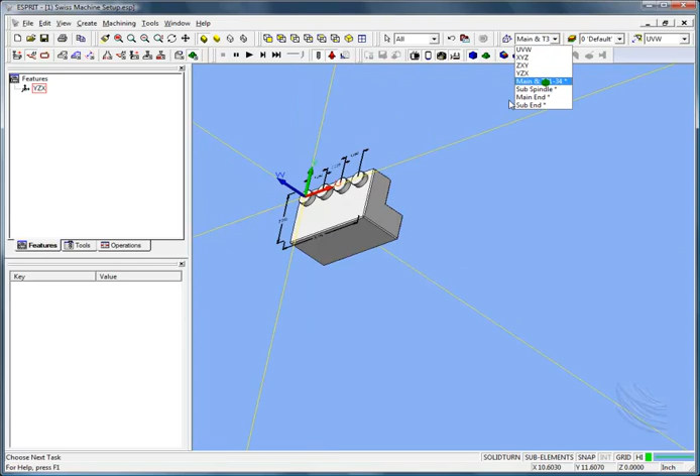All right, so let's go back to our top view here, and let's now go back and define a few other things with this. Zoom it down, drag it over, and open up our machine setup one more time. And assembly, end gang turret, got our axes. Now on axes, let's take care of the axes situation here also.

For axes, we don't need the index turret obviously, so we delete it, but we do need to add an axis. And that axis is going to move, as we see in the picture, along X. It's this X3. So we're going to define an X-axis, a new axis called X3. And in there we will plug in the amount it's going to travel. Let's say -2 to +2, it's got 2 inches of X travel.

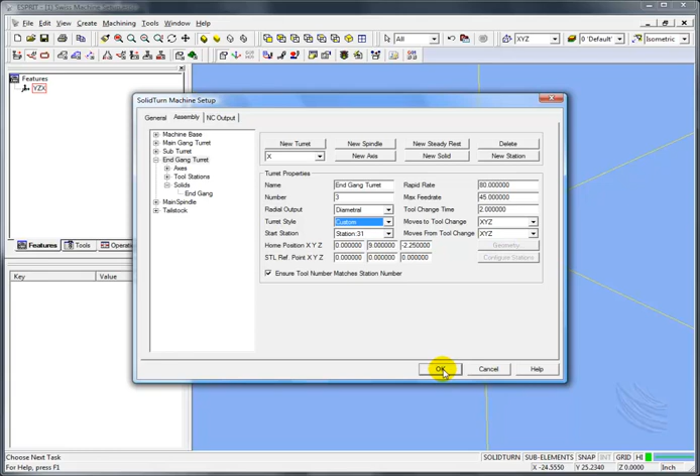Assembly, end gang. Now, why do we have the other block in there? Well, that's because I left this on gang, and what gang did was use the geometry we typed in here, but then it also added the graphic from here. So what I really needed to do is take this and change it back to custom. When I do, it will not use the graphic or the information typed in under geometry. So let's fire that off again.

All right, there we go, and there's our other block. So now we have this block, which is offset, setting here, and that's what that minus 2.25 inches did - it offset this out in this direction. So now it's sitting there. There's this, and here we have this information.

The only thing we don't have here is our spindle solids that we created earlier - we don't have those listed. Also, there's one other solid that I had in the part that I didn't talk about, called the base. The base is just a kind of backdrop. So when you have the base there, you can have these other items, and it looks like a wall, if you will, on the machine. It makes it a little easier to visually see. So, I forgot to do that.

Let's take this and save it as an STL real quick. So I grab that, do a file, save as, go down and select STL, and I'll call this the machine base and save it. Okay, all right, so now let's go back into the machine setup.

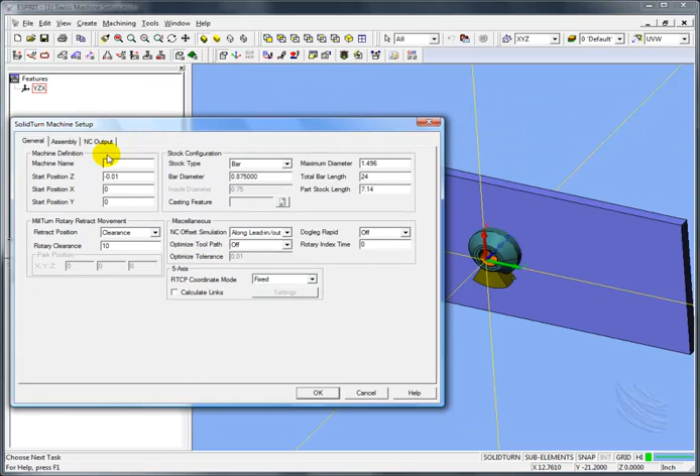If we go into assembly, these are all the components we need to add next. None of these components need to move, they all need to stay stationary. If I attach them to any of these three turrets we defined, it's going to try to move them with those turrets. So what we do is add those components to the machine base, which will stay stationary. I go to solids, and now I can add solids underneath that.

I can add a solid, let's say I'll add the base. Give it a name, give it a color. I'll make it that blue color that's there, but I'll make it somewhat transparent so I can see through it. And I'll browse for the machine base and embed it.

Now I'll add a second solid, new solid again, and this time I'll add the spindle base. This name is not the name of the file, it's just a name so you can remember what you've plugged in.

So we grab the next one and see what color did I have. I had this kind of brownish color right there, that'll be good. I'll make it solid, so I don't really need to... actually, I might want to see through that one a little bit too, so I can see the stock inside of it. So that'll be the main spindle base.

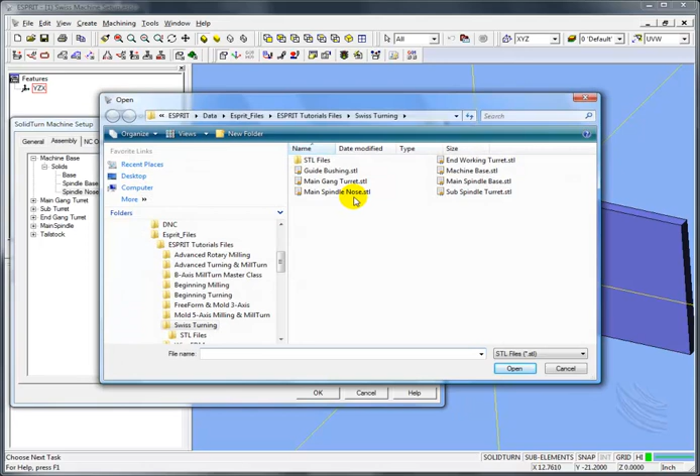Embed it, do another solid. This will be the spindle nose, and that color was... let's see, that one I think. I'll make it transparent, about halfway transparent. If I go all the way it'll disappear, so I can see halfway through it. Main spindle nose, embedded.

Let's add one more solid, new solid, this will be the guide bushing. I'll make it a bright color like this orange, and make it transparent as well - maybe not as much, but transparent. And I'll grab guide bushing and embed.

Now we'll hit our OK button, and turn those other layers off. There we go, and let's now go in and fire off a simulation. Get an isometric view so you can see. Now we've added those other components. You can see how we can see through this back wall, and that'll help us see this chuck so we know the location of the part. We can see all of the components through it like so.

Now you'll notice we have this orange guide bushing inside. We'll talk more about the guide bushing later, but just so you know, the guide bushing I've defined is not the size of the part. The reason is I need this part to be able to move in and out without anything touching it, so I can use simulation properly by setting it to either tool and collision detection, tool and holder, or set it to full. If I use that, it will detect this hitting into a solid chuck here. So this bushing is really not anywhere close to the right size, and it's on purpose - that way I can make sure I can see the material moving in and out, but I have a nice gauge for where this bushing lays, which is along this spindle nose area.

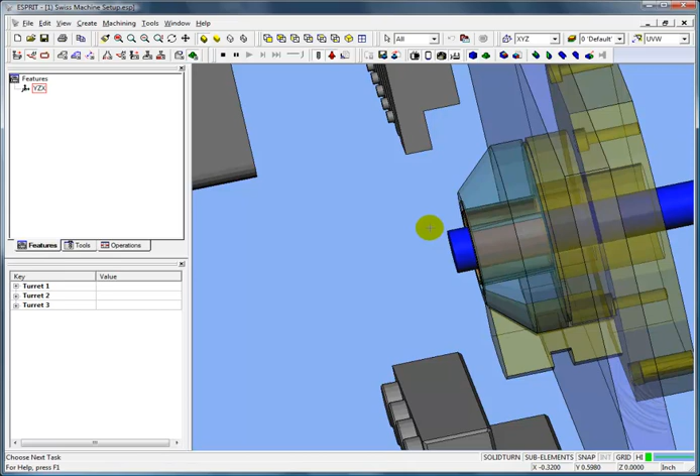So this is the length of my guide bushing, is this length here in this machine. If you've dealt with any Swiss machines, you know the concept of guide bushing - we'll talk about that a little later when we get into actually doing a part.

At this point, we've actually created this machine setup, and it looks correct. Everything is at home position - this turret's at home, that turret's sitting over here out of the way. It looks like what we want to work with. So this is going to be our baseline for the projects we're going to do in our Swiss tutorial. We'll be using this machine setup with turning tools located here, milling tools, drills, etc., and we'll go through a couple different Swiss oriented type projects.

Now, once I have a machine setup defined to this point, one of the things I might do is go into setup, right click in here, and save this machine setup. You notice that when I do, I already have one called Swiss Masterclass.

And that was already loaded with your files when you installed the files from the tutorial. And that is this particular machine setup. So I've already saved it, but you obviously could save it, put a different name, and you could save that yourself as well. Now, when you save that, of course, it won't be saving all of these solids in here.

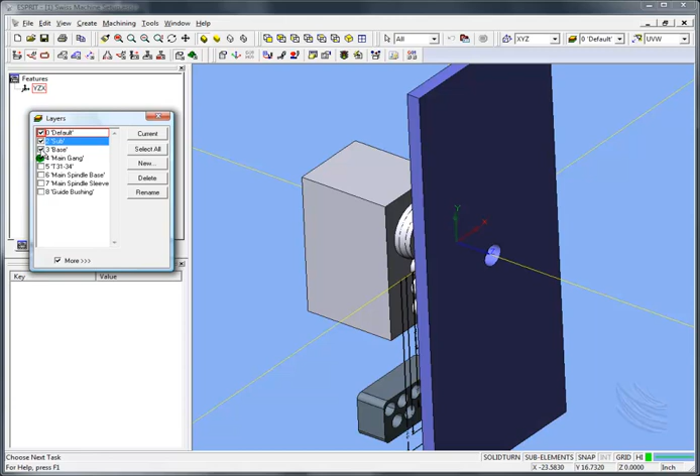These solids won't be saved as part of that, and that's fine. There's no reason for them to be there. Once they're embedded in the machine setup or directed to those with regards to their path, you don't necessarily need to save that as part of the file.

Now, if I were to want to save a template file at this point, if I did a file save as and say, okay, give me a template file, which, by the way, we do have a template file already saved here in the list of files in the tutorial. This template file would, in fact, include all of the items on this layer. So it would include all the solids from the part.

So I personally probably wouldn't make a template file that had all this extra baggage, if you will, inside the file. This file was a unique file because we had all of these solids in here designed primarily just to kind of give you a feel for how to define a machine setup.

And if you decided to draw a few things, it could be crudely constructed like these are, or they could be something quite fancy, or you might get that from your machine tool vendor. What we're doing is simply showing you how you can take and convert these solids into something usable inside of your machine setup. So at this point, I think I'm done.

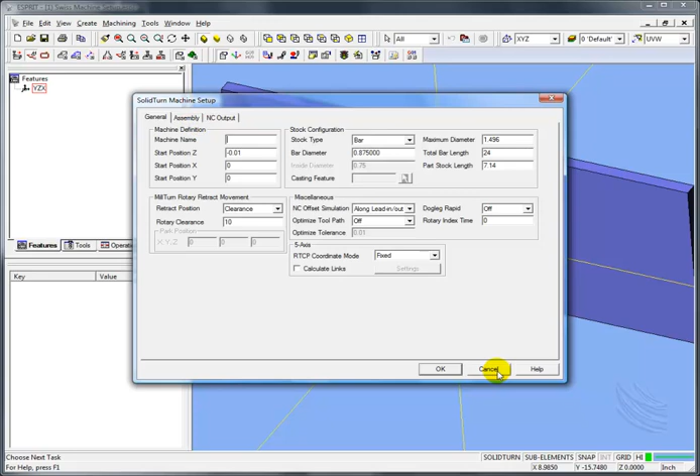Oh, one more thing on this machine setup. Let me turn this off for a second. Actually, one more component we forgot to add. I'm really nowhere near done with machine setup, by the way. I'm done with defining the solids. Kind of got excited there, thinking I was done with that part, but I'm not.

One other thing, we have a main spindle identified, and even though we defined a sub turret, that's not the same as having a sub spindle. In fact, if we look at this part, you see that the sub spindle over here consists of a hole. It's just a hole in the part. So it's really not a sub spindle. It's just a mount, if you will, for the sub spindle.

So one of the things we have not done is we have not added a sub spindle to this. And that's what we're going to do next. So we go to Assembly, and now we're going to add a new spindle. Now in this new spindle, it just says spindle. I'll give it the name. It's called a sub spindle. And it's spindle number 2.

And then what type of spindle is it? Now, normally you might say it's a sub spindle, but really in this case it's not. It's a turret spindle. That's because this spindle is actually part of a turret. It moves along with this turret. And now below that we tell it which turret it's on. It's on the sub turret. And which station is it located in? It's in station number 20.

And now we look at our orientation. Now we're setting in this orientation here. Actually, it should be this orientation, Z minus. That matches up with the picture showing the Z goes in the minus direction going this way. So that sets up left minus.

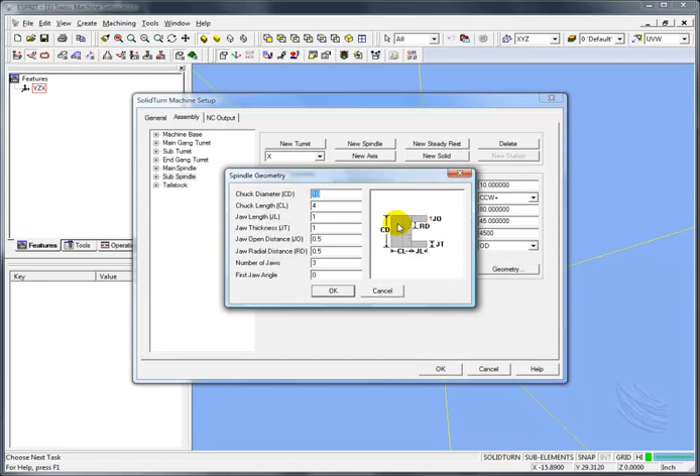Now, there are no solids associated with this sub spindle, but there is an axis. And so we want to define that axis and use that axis. That axis, if you think about it, is going to come from the sub turret, this Z-axis here.

So you see how we don't necessarily need to add a separate axis. If I had another axis here, this would be telling us that the sub spindle can move independent of the sub turret that it's attached to. So I'm not going to add another axis. The Z2 has been defined up here, so it's not necessary for us to add the axis down here.

Okay, so now if I hit OK and I fire off a simulation, we should now see a simulated chuck located inside of the sub spindle. And that's the actual sub spindle that's located in the sub turret. So there's two components here, a sub turret and a sub spindle.

By the way, we'll see that some of the round components here are faceted. That's because of the tolerance that I chose when I created the STL files. If I wanted that to look smoother, I could have decreased the tolerance to make that a much smoother drawing. I don't really care about that, but that's something you can do to increase the graphic visualization of those components. Okay, good.

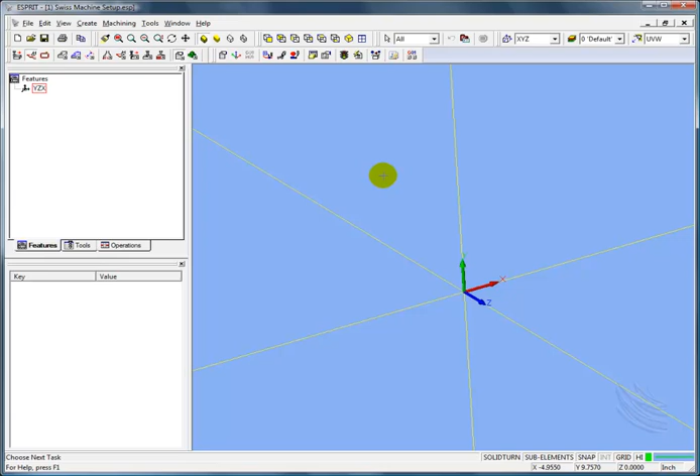Well, now that we've finished the graphic portion of our machine setup, we need to move on to a bit more of the details, and that is we need to go into machine setup again and go to the NC output page. And this is critical because this is what's going to determine how the NC code is going to be processed for our particular machine.

Now, the first thing we need to make a decision on is the NC output order. How do we want to output our NC code? There are three choices. We can output it by spindle, by turret, and by head. Typically, virtually all Swiss machines are going to use the head method. Just so you know the difference between spindle and turret.

Spindle and turret gets used primarily on machines that have twin turret and twin spindle capability, where the NC code is output as a separate program for each spindle or each turret. In the case of a Swiss machine, that's not terribly practical, because typically groups of turrets or gang turrets or cross slides are gathered together in what's called a head. A head is, for lack of a better term, a collection of turrets and sub-elements that belong to that head.

Now, the number of heads is important. This determines the number of programs that need to be output to drive this machine. Most common is a Swiss machine that has two heads, and that's what we're going to use in this case. But understand there may be more. There are machines out there that require three heads, or three programs to be sent to the machine tool. We're going to be using two different heads.

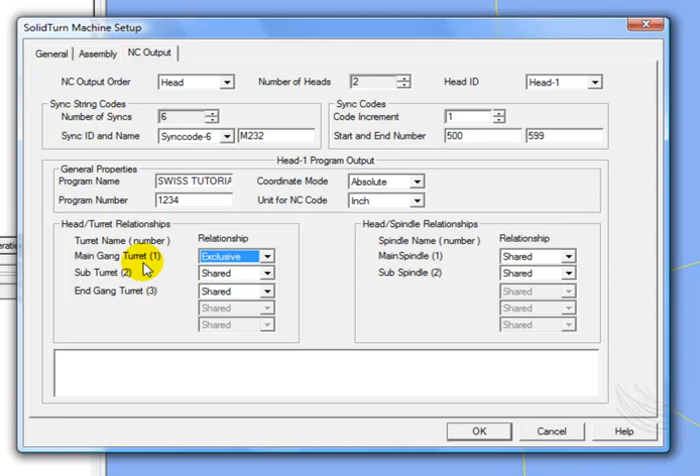Now we could look at sub turret number 2, and that is the turret with the sub spindle. Well, that would be possibly shared. There could be operations that we might cut with that we might want to be part of head 1 or head 2. Now I'm going to go ahead and hit OK here. I'm going to go in and turn on our machine again to get our bearings.

As I mentioned, I've told it that this particular turret is only used with head 1. Head 1 being controlling the main gang turret. Head 2 is going to be for the sub spindle and those stations. Now, those stations here may well be output code-wise with head 1, depending upon the machine. It may be that we output those with head 1.

So in this case, I might elect to have this portion of the sub spindle control, these 3 stations, if you will, controlled on head 1. But I might want the sub spindle activity to all be controlled on head 2. Again, this is going to depend upon your machine. So I'm going to go in my NC output page on head 1, which is what I'm working on right now, and identify that I want the sub spindle, the sub turret, to be shared.

But then if we think about it, the end gang turret, do it one more time here so you can see. The end gang turret, well, I would never really use the end gang turret except with the sub spindle, would I? These tools sticking out can't do any good over here on this side of the part. They'll only work when the material is being gripped by the sub spindle. So we're going to have this particular end turret only work with head 2. So it'll be part of head 2.

So head 2 will consist of the sub spindle and this turret, whereas head 1 consists of the main gang and these 3 stations here. So that helps us to make our decisions as to how we're going to set this up. The end gang turret would never be used on head 1. So I would identify that as being never.

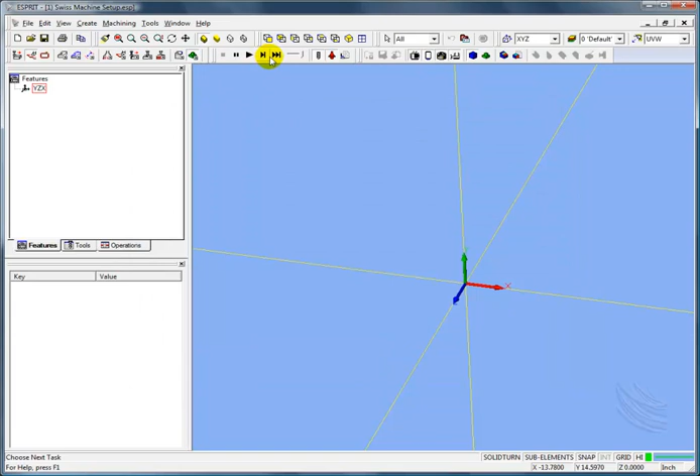With the exception of the end turret stations, these stations here, let's close this again. If I have tools sticking out of this direction on the main gang, those tools could be output on the sub spindle, in which case I may well output those stations as being part of head 2 here. So in this case, this particular main gang turret could actually be used both on the main spindle and with these 5 stations on the back on the sub spindle. So the best choice here is going to be a shared environment. In other words, head 1 can use both spindles.

Now we move to head number 2, in which case it blanks this out, and I can again say the same, Swiss tutorial, and I'll make the program number slightly different, which would be typical, because it would have a different program number. And now we look at the relationship on the sub spindle side. Should the main gang turret be used on the sub spindle? And the answer is yes. Those 5 back stations we talked about could be.

What about the sub turret stations? Could they possibly be used on the sub spindle? Well, technically no, other than the one station that is the sub spindle. So I'm going to leave that on shared.

And then the end gang turret, I'm going to change this to exclusive, because that end gang turret can only be used on the sub spindle, and it can only be used on head 2. So you can see how we've basically identified that both of these turrets can be output both as head 1 and head 2, whereas the end gang turret can only be output as head 2.

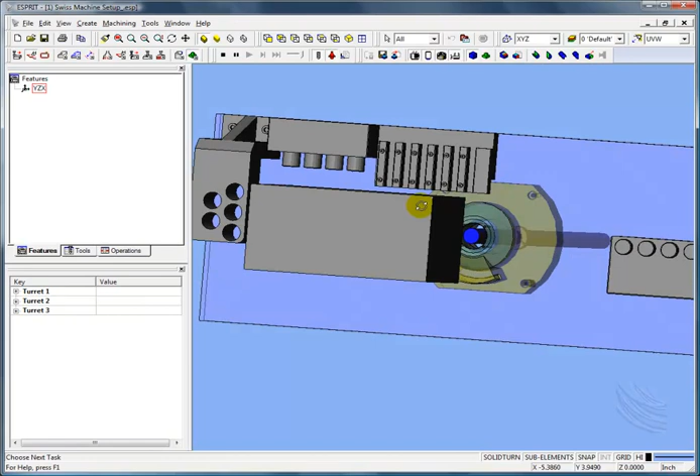We're ready now to move on to the next segment, which is going to be using this for an actual operation. Most notably, tools. So you have no tools in any of the stations. So it's important for you to know how to place these tools in the stations. So that's what we're going to talk about now, is defining those tools. And we're going to start by dealing with the turning stations here on the main gang turret.

Now to do that, we first need to get our bearings and understand the distances. You see that the width in the slot is 443, and the distance is 886 from here to the next slot. So 443 is the key number that we're looking for. So let's go define a tool. Let's put a tool in, let's say, station number 1. I'll drag it over so you can see. There we go. We're going to put a tool up here in station number 1.

So let's go to Tools. Matter of fact, I'll close this so we can see a little bit easier. You'll see that we now have all of our 15 stations on the main gang turret. We have all 4 stations on the sub turret and the 4 stations on the end gang turret. Now you will notice as you scroll on down, if you were to open up unassigned, you will see a whole bunch of tools down here, and that's because in this file I have defined a tool for virtually every station. I think I left 1 or 2 stations out.

We can obviously move these tools into the appropriate stations as needed, but I want to go through and define some of these tools on our own so you understand some of the unique techniques you must use on a Swiss machine for managing the tool locations in your custom turrets. So let's go define a tool. Let's deal with the turning tool first. I'll do a turning insert.

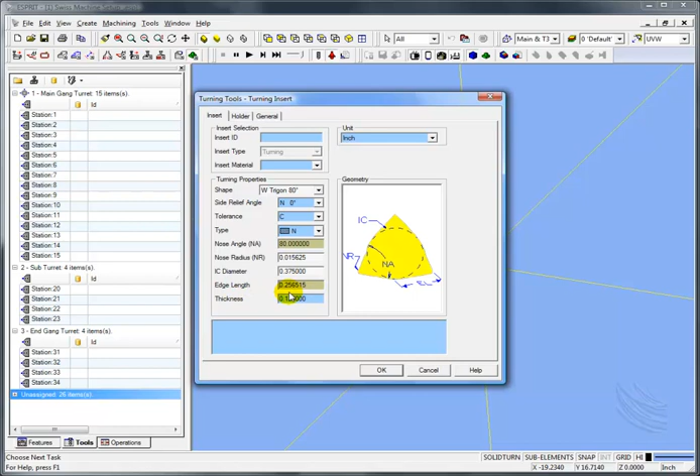On the holder page, it is a turning tool like this. The style holder I'll use is an L-5 lead. Now, shank size, there is not going to be a shank size up here that's going to say 443. So I'm going to pick a 1/2 by 1/2. I'll leave the rest of the settings as they are, but what I'm going to do now is adjust these numbers inside of here. The key numbers I want to adjust are this A dimension and this F dimension. And so on the A dimension, I'm going to plug in 0.443.

On the F dimension, it too is 0.443. Now I'll leave the 4-inch length, it's fine. B dimension, I could adjust it. Usually I'll make it the same as A, but again, it doesn't matter here. The E dimension I could adjust, but this will make this a square block tool station. General, we'll just tell this is a face and turn. And it's going to go into the main gang turret in station 1.

And then now we need to make a decision on orientation. Clearly, if this tool is going to be used on the main spindle, and it's going to be used to do both facing and turning work, it should be setting like this, a 4V orientation. So I'm going to set that tool in just like that. So 4V. All right, it says home, home, home. Everything's good, and we hit OK. And now we have a face and turn tool. Fire off simulation. We now show that tool setting up in that station.

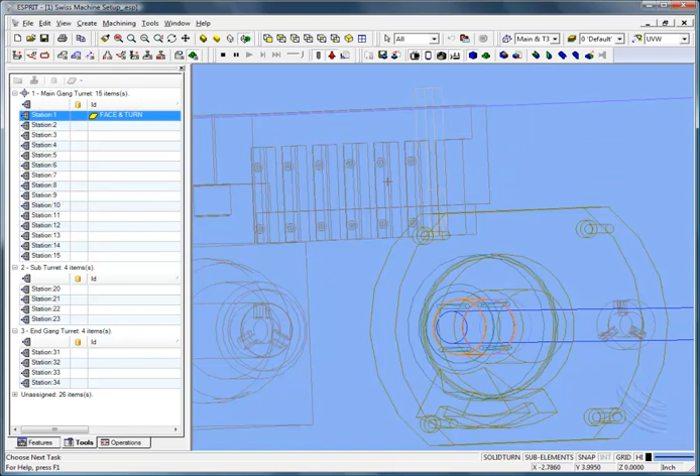Now, one thing you will notice is how that tool is actually sticking up too far this direction. And that's just because we identified the end of the tool post, which is actually where the insert is, as the gauge location for this tool. That was a decision we made inside of machine setup when we went into our stations, and we identified we were working off the tool point, which is the tip of the tool.

I recommend using that. And I could use tool base. We'll take a look what that does. You see the difference here. Tool base is going to simply use the base length as the length for which to locate the holder. I'm not real crazy about that method. I'm going to change this back now and change that back to station 1. Change that back to tool point and OK.

Now on that tool, I want to go back in and edit that tool again. Back to the holder page, 443, 443. In fact, I'll make sure this is 443 also, just to make sure. Now what I'll do here is I can adjust the x-axis of this tool to determine how much of that tool is going to be out of the holder. That's a decision I can make on the tool itself. For example, if I want to move it out 1 inch, I can plug in -1 inch right here in this tool shift of X. And what that will do for me is it will position the tool like so. And see how the tool is positioned with 1 inch coming out this way.

I like this method of managing the lengths of the tools coming out of the turning tools, so each tool independently can have different lengths to them. So now we have that insert setting like this, and it's in the right position. It would work well for a face and turn. Now, what if, let's say this part required some back turning. Once we get the material fed out, we need to come in and do a back turn. So we need the insert pointing in the opposite direction.

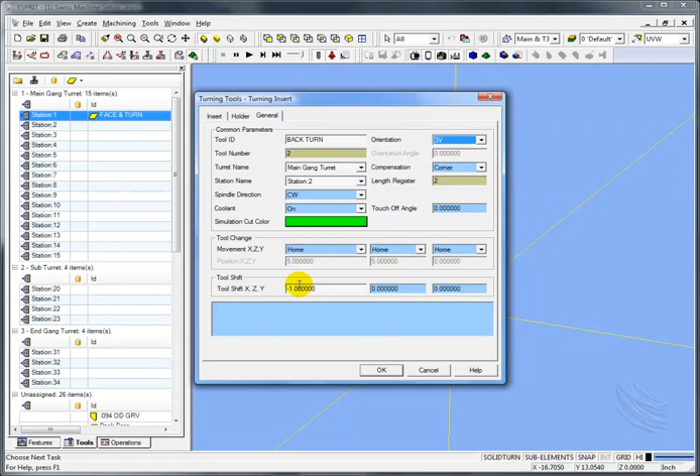Now orientation. If it would be a back turn, I would want this orientation, 3V. And I'm going to leave this -1 inch to shift it out of the holder. And it's in station 2, and we hit OK. Now when I fire off simulation, take a look where it's sitting at. You see where it's sitting? And that's not going to work.

And that's because it uses that same tool point, this same gauge point here, and when you change an insert to a different side, it basically rotates it around. So in other words, it's using this point right here on the tip of the insert relative to this corner of the holder. So this is where we're going to need to shift the tool.

So we'll go in and we'll edit that tool, and we'll simply add some shifting in Z and in Y. Now what we're going to do is shift in Z minus the 0.443 and in Y minus the 0.443. That's going to shift that tool back into this station. You can see where it's located now into that station.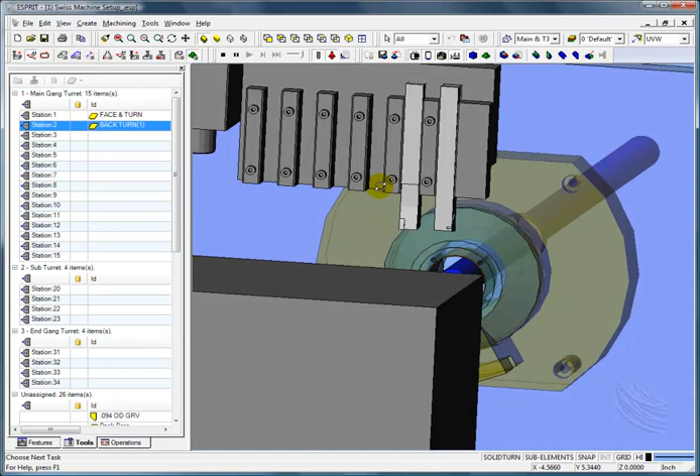The same problem can happen if you decide in midstream to change the hand of the tool. For example, my first tool is a right-handed tool. If I change this holder to a left-handed holder, the insert's clearly on the opposite side. If I fire off simulation, you'll see the tool is now in the wrong position, because it's using the left-handed holder to position the tool point 1 inch down from this corner, and the holder goes off in this direction.

So when you make a change like this, going from a left hand to a right hand, understand that you most likely will need to make a shift, in this case the Y. I'll move it 443 thousandths and fire off simulation, and now it's back in its station. So as you place tools in stations, you need to know you have to move those things around as needed.

Now if you have other tools defined that you want to use, let's say I have a smaller tool, a mini turning tool. If you look down the bottom, I've got a mini turning tool here, and I can easily move this to the main gang turret, station number 3. And what happens, it'll position in station 3.

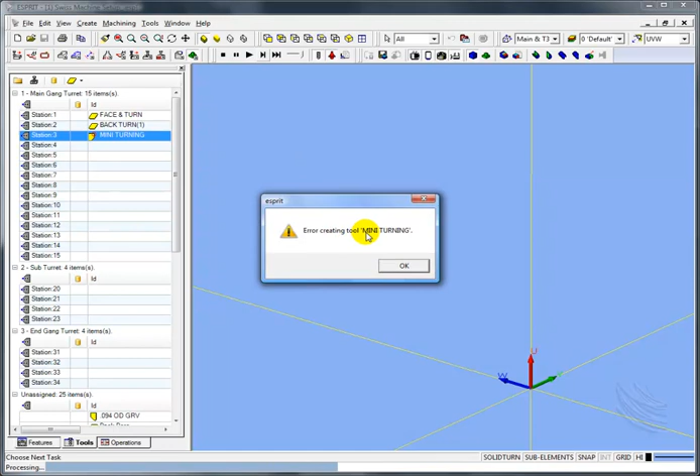Matter of fact, if I right-click System Default, it changes to a value of 437. And if you were to go ahead and use that default, you'll get an error telling you it can't. I'll show you that. Default, okay, fire off simulation. Error creating tool mini turning. Anytime you see that error creating mini turning, or any of the mini tools, it means there's a math error in your tool definition. So it's important that you physically model this out to identify it correctly if you wish to use those mini turning tools.

So now if I define that correctly, I get the right tool in the right place. The only change I need to make here is I want to shift this tool out that 1 inch as well. So I'll shift my X value minus an inch, and there we have that.

Let's grab another turning tool and move it into there. Let's grab an 094 grooving tool, I'll move it to station 4. We go back up, and there it is in station 4.

Same is true here. You want to make certain that this A dimension makes sense relative to B. If you type in a number here, it doesn't always mean that number is going to be right relative to B. So you need to model this out and draw it correctly to get the right values for A and B. Because the same thing will happen if I just went into B and did a system default - it'll say 0.1 for B, and you see how 0.1 is bigger than A. If I try to fire that off, I get an error for that groove tool.

So, like I say, use a little caution. These tools are great if you wish to use them. It's just that you got to make sure that the numbers are right, so don't trust the defaults that are in the fields for any of these mini tools. Confirm them yourself, plug them in right yourself, etc.

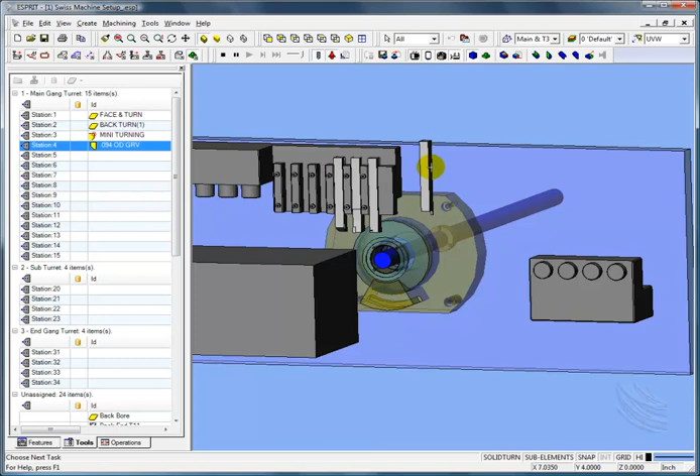Let's go take a quick look at station 1, 2, 3, 4. See what we have? A little typo. See how it says a positive number? Take a look when I fire off simulation. So you can see the graphic of this solid has nothing to do with where this tool is located at. This tool is located based upon the settings in the machine setup for those stations. So a simple thing like a plus instead of a minus can make a world of difference.

And let me check the others while I'm at it. And they're all okay. Now if I go back and edit that tool, of course I'll want to stick it out an inch. By the way, I'll talk about this setting. Actually, this setting was in there. I'll talk about that in a moment. But what happens is with that tool, and here's that tool setting here, there's that mini grooving tool.

What I found is with those mini grooving tools, depending upon where you're going to touch off the tool at - in this case, I'm using a 4V orientation - what I had to do is actually allow for that 94 thousandths of the width of the insert, this A dimension. I had to allow for that in a tool shift. I'll turn it to 0 so you can see what I mean.

You see when I do this, you see how that station is actually sticking into wireframes. You can see it's actually not in line with the other stations. There, you see how it's sticking in here? That's because what it does, it looks at that side of the insert and it uses that as the gauge. So you have to take that into consideration, and in my case, plug in minus the 94 thousandths to shift it. Now I'll have that in the right location.

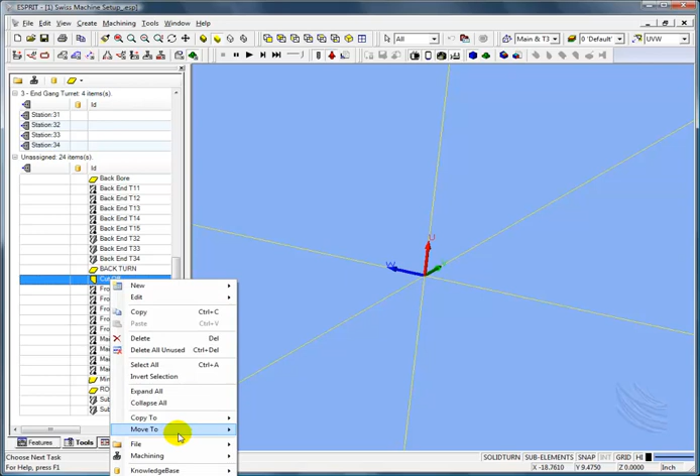Now, of course, once these are identified in the right locations here, I can move these around. Like, for example, well, let's grab another tool. Let's grab a cutoff. Let's move it into station 5. And of course, if I fire off simulation, there it is in station 5. It's really not in the right length, so I'd want to adjust it some.

I'd want to add in a -1. Now notice, by the way, it already has shifts in here. That's based upon the fact that we have the type of handed tool requiring that shift, and the fact that we're doing a 3V instead of 4V orientation. So this tool already was compensated. If it wasn't, change those to 0. Fire off simulation - you'll see how that tool is actually sitting through the back of the part.

So just got to remember that when you define these tools, depending upon the orientation here, depending upon the hand of tool here, you will most likely need to make adjustments in the shifts for the X, Y, and or Z. Now keep in mind these shift numbers here are equal to the width of our tool slot, so the 443 is a constant number - you won't have to be monkeying around with those numbers.

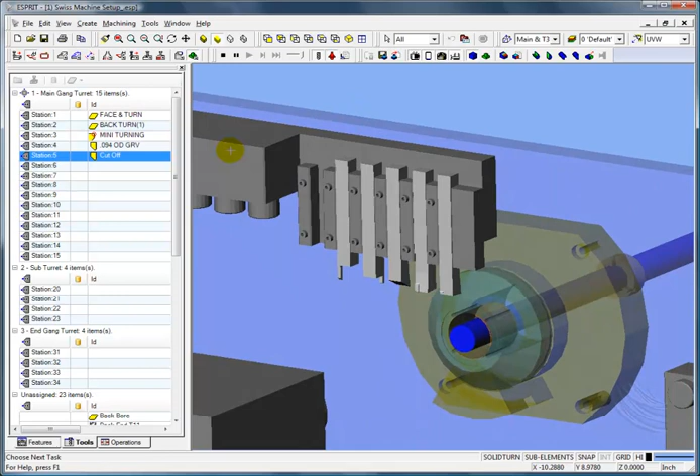All right. Now, and of course this cutoff tool is another one of those mini turning tools defined as a cutoff. And that's one of the style choices you have. You can either have it as a back turn tool, a front turn tool, or in my case, a cutoff tool.

Now the next consideration, for turning at least, is that you might not want your cutoff tool way down here on this end of the gang turret, because when that tool has to be in position to do a cutoff, the sub spindle will be up and engaged with the part most likely. And the concern here is you might run into this tool post. So usually a very good practice is to put the cutoff in station 1, for example.

So what I might do is move a couple of tools and stations. For example, I might take and say I'll move this back turn tool to station number 6. And I'll move this down to station number 2.

And I'll move this up to station number 1. Now all that moving around should have no bearing on how the tool looks, because I did not edit the tool stations to position this.

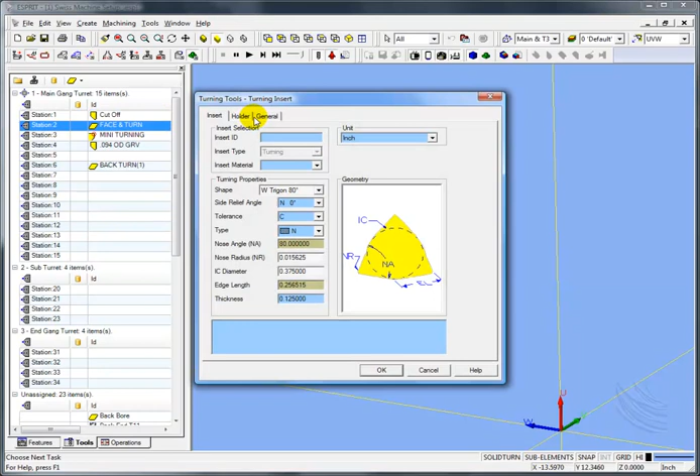There's two schools of thought for adjusting how the tool is positioned inside these tool post areas. One is the way I've shown you, which is to edit the actual tool shift, which shifts that particular tool. You can accomplish the same thing by going into Machine Setup, Main Turret, going into a station and making those same adjustments there. I could have put in -1, I could have put in -443. I can make those adjustments in the stations.

The disadvantage of that method is that if you were to move a tool from one station to another, you're kind of in trouble - you're toast, because you'd have to go back into the station to make those changes. So if you edit the tool like I've done in this case, then as I move the tool from station to station, its relative location is already defined inside the tool definition, not inside the station. That allows me the freedom to move these tools as needed. Once you define the tool the first time and do it right, getting the orientation the way you want it and setting it correctly in your station, you have the freedom to move these tools from one station to another.

All right, so now we're ready to move on to some of the milling stations on the main gang turret. Let's define some tools from stations 7 through 15. We'll start by going up and selecting a milling tool. Let's just select something simple - let's just do a drill.

In this drill, I'll call it a tool ID. We'll call this tool name milling tool - something simple. Tool number, I'll worry about that in a minute. I'll say a 7, and I'll put that in station number 7.

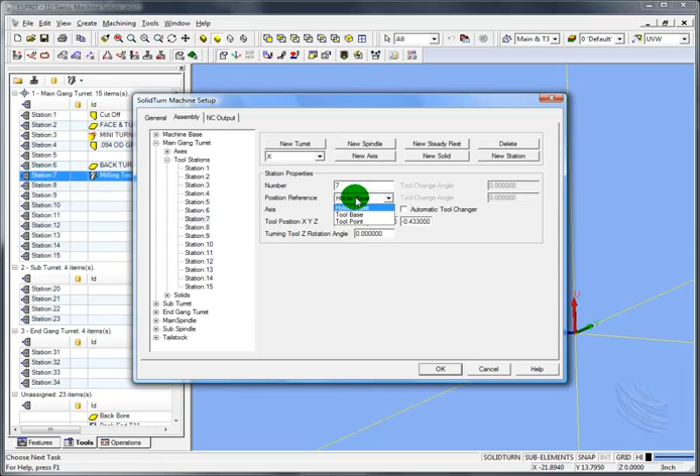Let's go into station number 7, and you see we have a Y dimension to the center of the station, offset in X, but the tool is actually working off the holder base. And so what it's doing is it's adding a holder base here. Let's try a tool base to see what we get if we do a tool base this time. There. Now you see the tool base locates the tool up against this position here.

Now the station's a little bit big, so I will stop that and I'll make the tool holder a little bit smaller. Say it's 750, something like that. Okay, so there's that tool sitting in that station, and its location is off center, just like we had before. You kind of see how it's off center, but it's in the center of that station because unlike the turning tools where you might move these stations around, you don't want to be moving these stations around. The only thing you ever want to be adjusting here are going to be your lengths.

For example, if I want this tool to be longer, I want the tool holder to be longer, which I'll identify that way as a tool base. Or if I want the tool itself to be longer, I might go in and say, let's make this 2.5 inches long. I'll have a longer tool sticking out this way. I actually adjusted everything when I did that. But you see how you can make those kinds of changes.

All right. Now, of course, from here, I can move this tool. I could copy it to any of the other 3 vertical stations. And if I just do a right-click, copy to station number, let's say 9, for example, fire off simulation, you'll see that tool sitting here. It's in the wrong position. That's because we made that adjustment to the tool station on 7, 8, and 9.

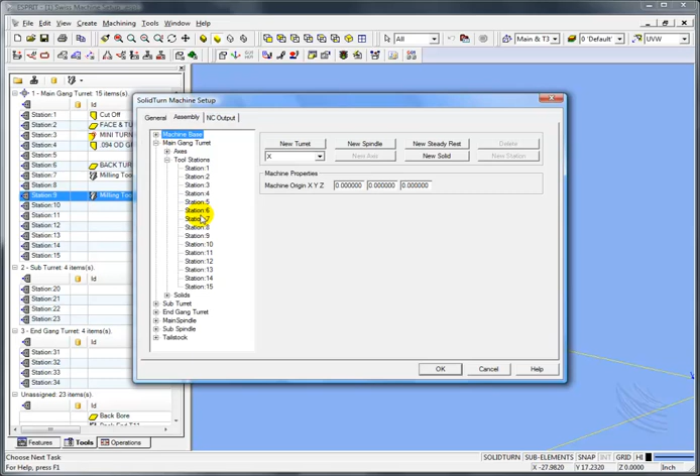Let's go back in. 7 should be tool base. Let's make 8 tool base also. Let's make 9 tool base and 10 tool base. Now let's fire this off again. There. Now you see that tool sitting here.

Now I want to take that same tool and I want to put it in these stations out here. Now I can copy this tool into, say, station 11, which is the first of those stations. I can just do a right-click, copy to, in gang, station 11. Okay? But the big difference here is I've got to make certain that my orientation is right. If I don't, the tool is going to still be sitting vertically. You can't see the tool, can you? Go to wireframe. There it is. See, it's sitting inside because it's using the same orientation as these tools.

Not good. So we change that and we tell it that this tool orientation is, in this case, the axis orientation is now Z-. And that's going to get the tool pointing in the right direction, like so.

Now what we can do is we can take that same tool. Let's say we want to put it on the back side here. Well, in that case, we would copy it into the same station, main gang, into station number 11. But yet, in station number 11, we would change the tool orientation to a Z+. You see, get it pointing in the right direction. And we do an OK. We fire off simulation, and we now see it going in both directions. Good.

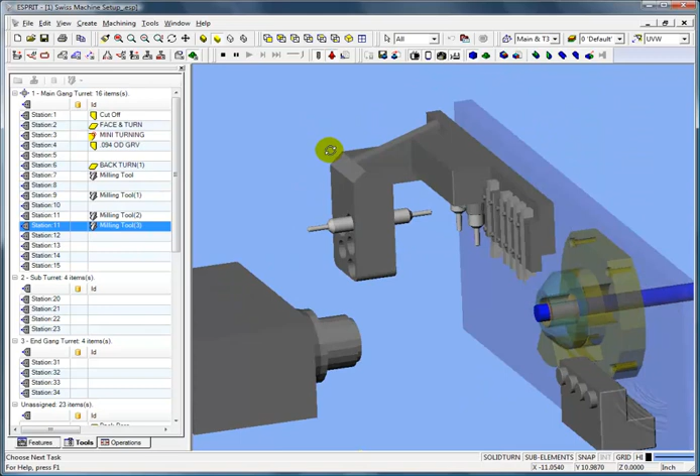Now, I want to place one of the tools out here on these stations. So I can take, for example, tool 11, which is pointing in the right direction. I can copy it to station number, let's say 21, sub turret, station number, let's say 23. Let's put it on the end. And fire off simulation. Now I see that tool sitting here. So you see how this orientation is the same as this orientation, which is called Z- orientation, which means it's pointing towards the Z- of our Z-axis.

Now if I want to put a tool over here in this station, milling-wise, I could take this tool and copy it over there because that's going to be the same orientation. If I take the second tool on station 11 and I say copy to, end gang, let's say station 33. Fire off simulation. There it is sitting in station 33. That's a little longer because of where the tool base is located, but that's fine. That gives us the location of where that's going to be in that station.

Let's move this tool up a station. I'll move it up to the sub, up to station 21. Now let's add another tool. I've got a mini boring tool. Let's put this mini boring tool into 31. Actually, it should be into 23, so I'll move it to sub turret 23. So moved it into 23.

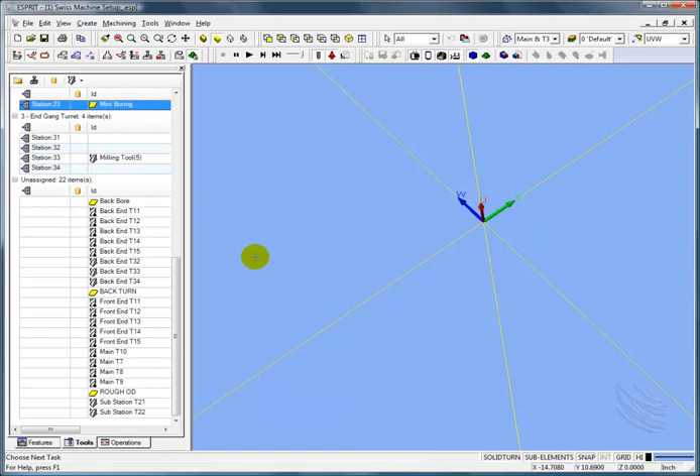Now, this mini boring tool, just like before, you've got to make sure these numbers match up. These numbers have got to be right. When I say 30 degrees, angle 1, angle 2, I've got to get my radius. All these numbers need to match up. Same with the holder. You've got to plug in numbers that work. This A dimension has to be bigger than this dimension. This FH dimension has to make sense. So it's real important to plug in those numbers accordingly.

Now what that does is gives me this mini tool over here in this station that I could use for turning purposes. So I can use that little mini insert right there to come in and do a bore. I could use it with the sub turret to bore out something over here on the main spindle.

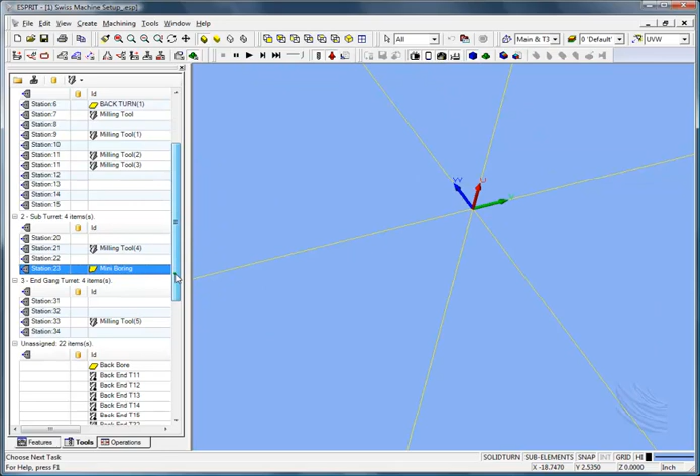Now another common practice is, once we position the tool into the sub spindle here, we might have some additional turning to take place, and the only stations we can use for turning are these stations here. This station right here is a fixed turning station. So what I'll do is take this back turn tool and simply copy it. I'll move it to the end gang station 31. That puts it here in this back turn station, which basically places that tool there.

Now, only problem is, actually that's not the right tool, is it? Back bore is what I want. Can't remember the tools I'm using. Okay, let's move that back, unassign. Let's do that back bore. I think that's the right one. Move to end gang 31. Yeah. So here we have a boring bar sticking in here that we could use to face, to turn, we could even use it to do a little bit of ID work on the sub spindle side once we transfer the part over to the sub.

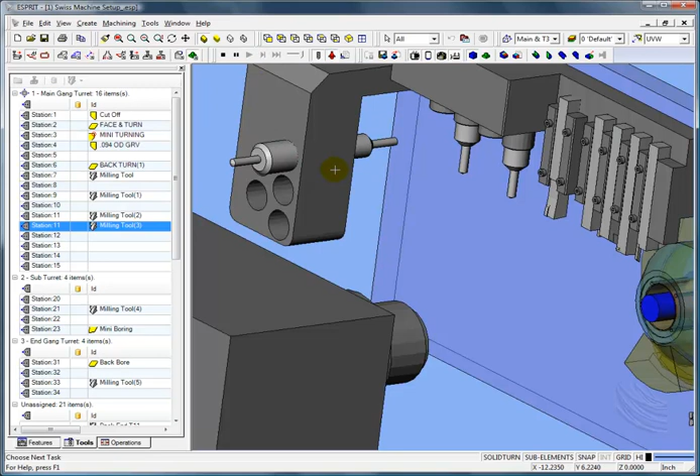So now we've placed a few of the tools in their locations, and it gives you a feel for how those tools might be oriented. Once we're at this point, we're really done with talking about how those tools are going to be adjusted, modified, tweaked, etc. And again, you can be a little bit fancier if you want to make sure the diameter of this tool is right. Looking at the tool station, you could go in and change this to be the right diameter holder, so you'll see it correct size-wise. All those are adjustments that you can make.

The key thing is getting the tools pointing the right direction when they go in the stations, and then for the turning tools in this main gang, making any adjustments based upon the hand of tool and the orientation, 3V, 4V type orientation choices.

All right, so now we are finished with this machine setup, and you will find there is another complete machine setup that has all these tools already defined. Of course, you can play around with these other tools, moving them into stations, to understand how they work in the different stations a little better. We're done with this exercise, and we're ready now to use this machine setup with the tools as we've defined them in the locations in the machine. Then we're going to machine a part using these tools and this machine setup and do an actual Swiss project.